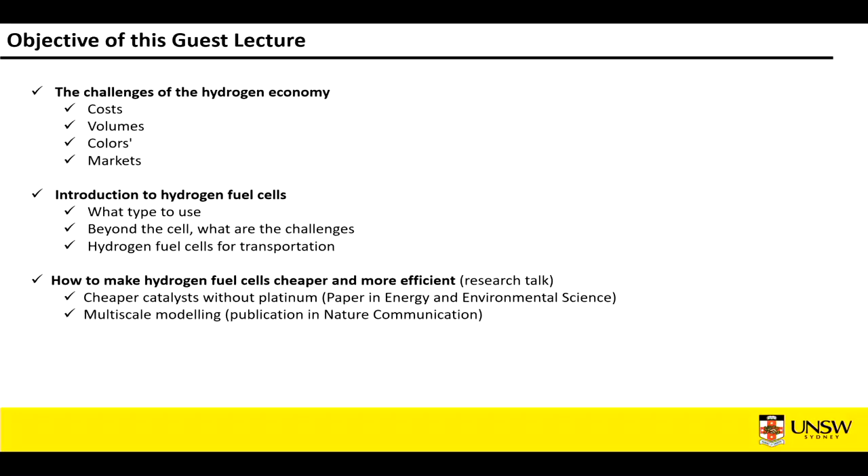So let's see. So the hydrogen economy. So first thing, all my figures are pretty much coming from the internet. I'm really focusing on telling the story of what's going on and giving my perspective. So I've removed the reference, but you can find all of these anywhere you want.

But the idea is hydrogen is a gas. It can be burned to produce high temperature. You can combine it with other elements. One of the challenges is you have very few amounts of hydrogen on its own. It's the world's most abundant element, but it's usually combined with other elements.

So what do you have? You can compress it, you can liquefy it, you can disperse it. That's the characteristics. It has a lot of challenges. One challenge is it's extremely flammable. It can catch fire, it can pretty much explode right away from the static electricity of your fingers. But that's something they've kind of sorted out mostly by storing it in big pressurized cylinders.

Otherwise, it takes energy to isolate. It can be challenging to transport because it's a flammable gas. There's a lot of work to make safer systems. And the big part of it, that's what I've been preaching: you can use hydrogen fuel cells as an alternative to batteries. And there is also work on hydrogen combustion engines, which I'll touch on at the very end, which are sort of cleaner than regular engines.

And you can use it in green. There's a lot of work for green steel. So instead of burning coal, you make it with hydrogen. That has potential as well. And there's a lot of different approaches.

So I actually made this slide, I think, about a year ago for a small conference, and I got sick, so I couldn't make it. So you guys are the first one.

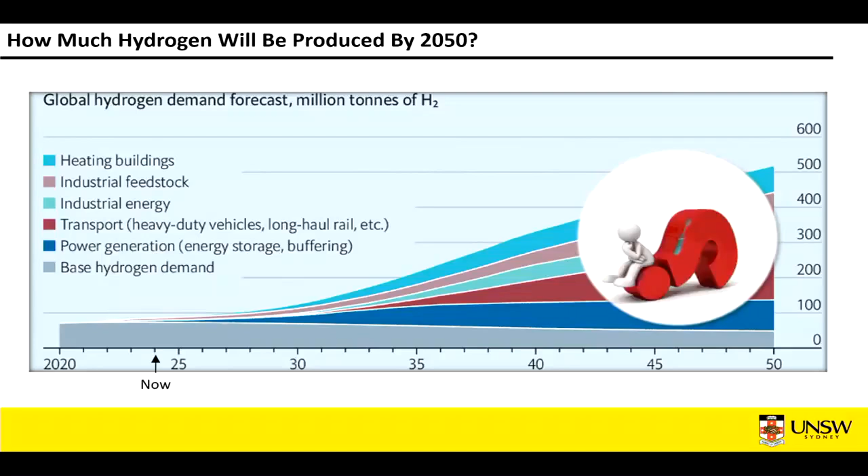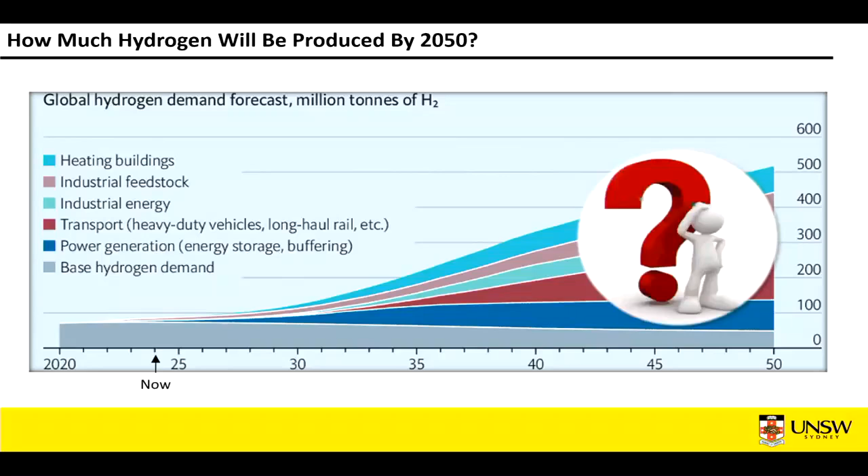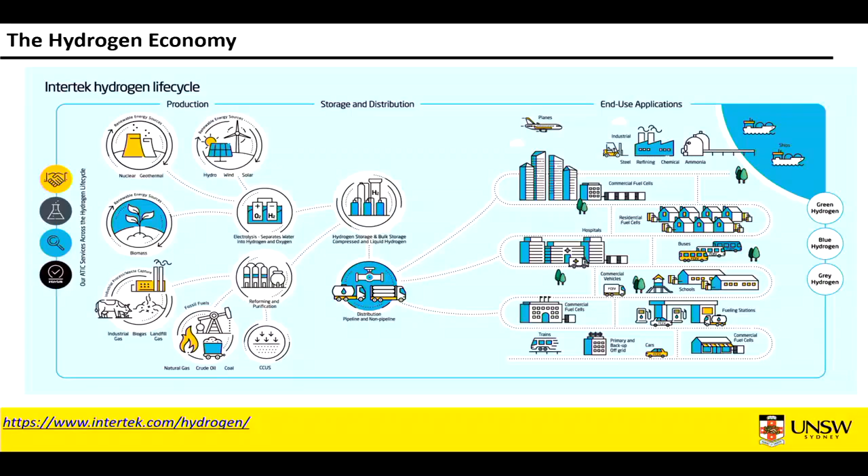So the first thing about hydrogen, there's a lot of talk about different colors of hydrogen. This started with about 3 colors when I started doing this. There is gray hydrogen, which is done directly, I think, from natural gas, so methane, which gets split into hydrogen and CO, and syngas. Most of the CO2 you emit just goes right into the atmosphere. So as environmental engineers, you can tell this is probably not a good way to go. But that's how probably 90% of the hydrogen right now is made.

And then you've got blue hydrogen. Well, that's kind of better. You still make it the same process, but you try to trap all the harmful emissions underground. The problem you've got with that, if you want to make 500 million tons of hydrogen, you will end up with 500 million tons of CO2 underground. So that's not necessarily very scalable.

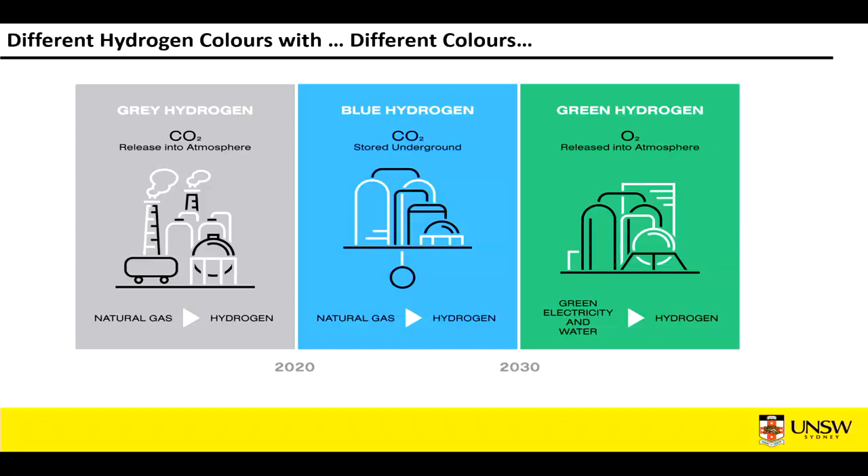And the best part is green hydrogen, when you basically want to plug 2 wires into water, split it into hydrogen and oxygen. It looks simple. In practice, it's not. It's very expensive. So this has gone from 3 colors.

And then a lot of companies say, I'm also making hydrogen with some fancy way, I also have a color. So you've got gray hydrogen, steam methane reforming; blue hydrogen, the procedure when you capture it; green hydrogen, which is the best. Turquoise hydrogen is a funny one, when you actually make hydrogen and physical carbon. I spoke to a guy once, his theory was, yeah, we'll make so much carbon, we'll fertilize the ground, or we'll create mountains, because we're physically making blocks of carbon at the same time. That has potential, but again, you have to think of the scale of it. 500 million tons of carbon on the ground may not be something we actually want to deal with.

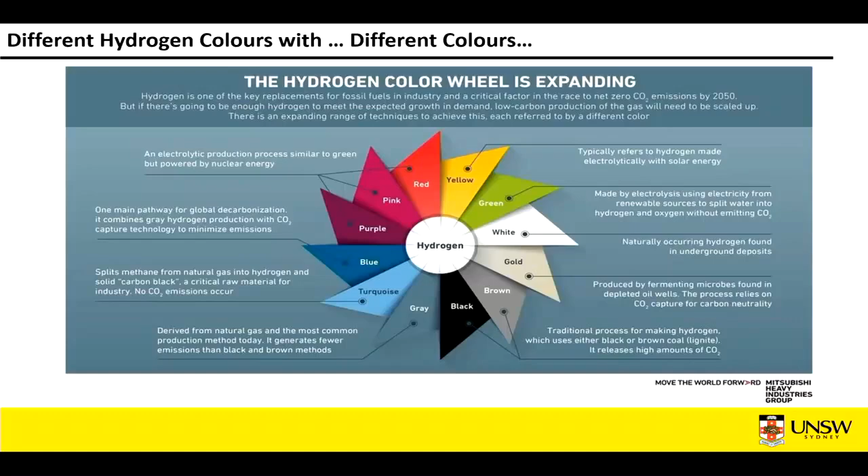If you use a nuclear power plant or a coal power plant to make green hydrogen, it's not green because you've made CO2 or you've made waste that's going to last hundreds of thousands of years. So not very good. The best one is the solar-made hydrogen. And then it keeps going all the way to the worst ones, processes making it from fossil fuel, splitting methane.

These are generally news articles about hydrogen, with all the different pictures - legit pictures that came out in the news. That's when people online were like, hey, what's the deal with hydrogen? So there's all this about the colors of hydrogen, the expanding ways of decarbonization, is hydrogen green, the colors of the hydrogen rainbow. That's when I started to see people on LinkedIn with weird titles like hydrogen P2X expert, hydrogen savant, hydrogen evangelist, when basically they've never even been remotely close to a hydrogen cylinder or an actual device. But they need to make a living, so whatever.

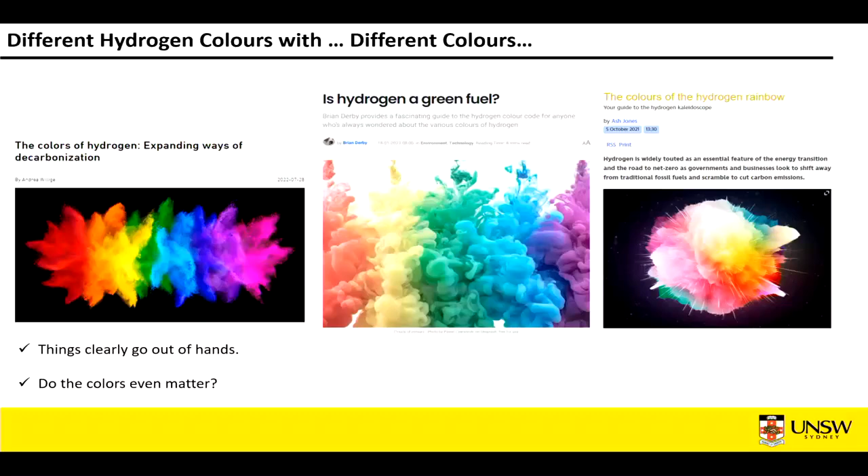A lot of people say, well, we should only make hydrogen with electrolyzers. The problem is the factories that have been making hydrogen with other methods, they can't just close business right away. It would take most of the systems, which have been designed to last 25 years. You can't just give up on that. So you have to find a way to make everything as clean as you can. You can even aim for negative emissions - say if you plant trees at the same time with whatever you've done, then you have negative emissions. Or there's a fancier way, if you reuse your heat or your CO2 and move it into something else. So let's see where we are here.

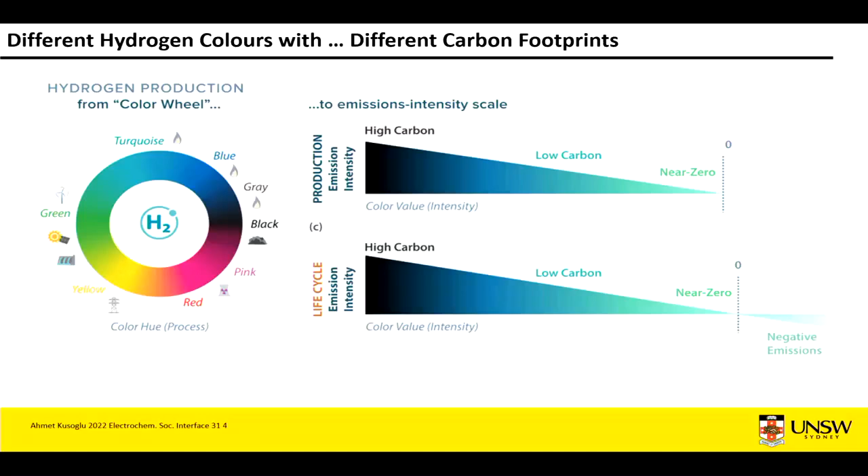I'm repeating myself a bit, but this is about the carbon footprint. Green hydrogen has no carbon, no GHG emissions, so no greenhouse emissions, perfectly clean - but it's only considered green. We got flagged recently in a proposal because we forgot that when we applied for funding. It's only green if the electricity is coming from renewable sources, from solar and wind. If your electricity is coming from coal, it's not green anymore, because you're storing the energy of the coal into hydrogen. Then you've got all these in between - pink hydrogen, yellow hydrogen, I think maybe the one underground, and then it gets weirder and weirder with less emission.

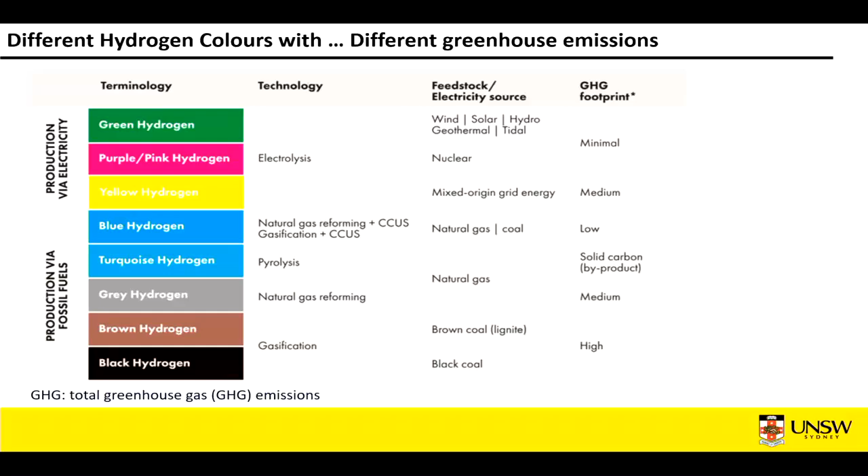The problem we've got is, this is easy - well, let's invest all the money into green hydrogen. And what do we have here? Sorry, the same thing, yeah - so high carbon to low carbon. Again, you should invest into the green one. The problem with that is that it looks pretty good.

The interesting thing these days is there's what people call cleaner than green hydrogen. The reason for that is there's an argument that nuclear may be cleaner than green. I'm not sold that this is actually true, because you're making nuclear waste that's going to last 100,000 years and will kill your descendants eventually. But right now, you could say it's green.

I work with people in civil engineering who work on that. But the point for me is, it may be completely green, but it may not be very easy to actually get it in a way that works. It may be blended with so much rock, oil, or other stuff that on paper it looks good, but it's not going to quite get there.

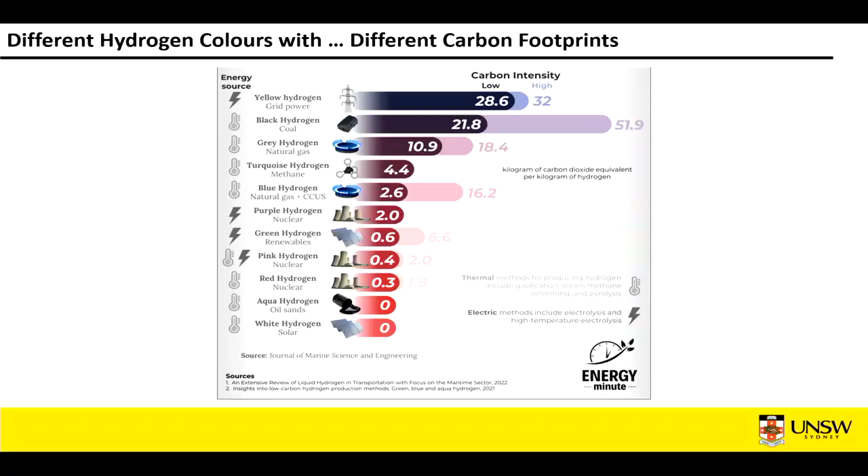The problem we've got is that we can't just switch all our money to green hydrogen, because it's also the most expensive hydrogen to make. And the reason it's so expensive is we need to use a lot of electricity to make it, whereas brown hydrogen and gray hydrogen, which have been out for quite a while, are way cheaper to make.

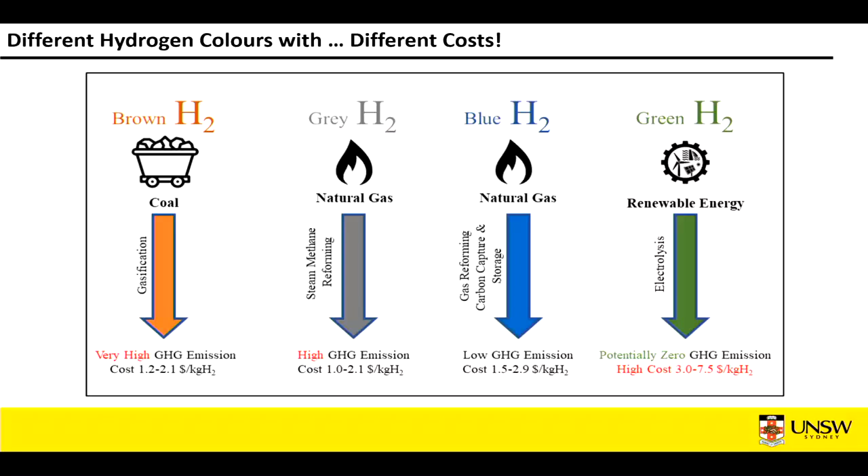These stats are changing all the time. There's a lot of work to make this cheaper, but overall the problem is how do we make the cleaner one economically viable? So the point is doing a lot of research.

Now that we've covered the price and cost, the volumes get worse. As I was saying earlier, 95 to 100% of the hydrogen currently is gray and brown, and some blue. The green hydrogen, which everyone keeps talking about, only makes up about 1%. And that's still evolving all the time.

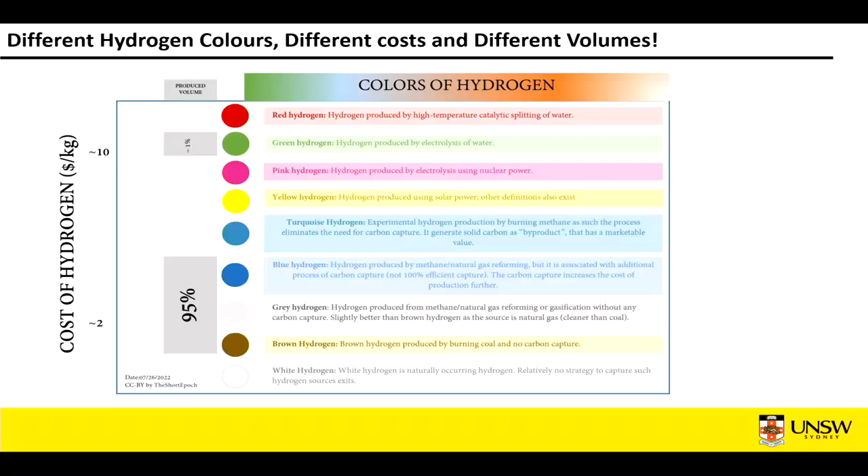But we want to go from 1% green hydrogen to 700 million tons per year in the next 30 years. So there is a long way to go. And again, that's what the prediction is.

As I told you guys earlier, this is a crystal ball. I'm pretty sure it's someone using Excel, making it slightly fancier than Excel, predicting: I've got this slope, it's going to increase by 2% every year, and there we go, we'll be completely fine in 2050. Well, we'll see where we go.

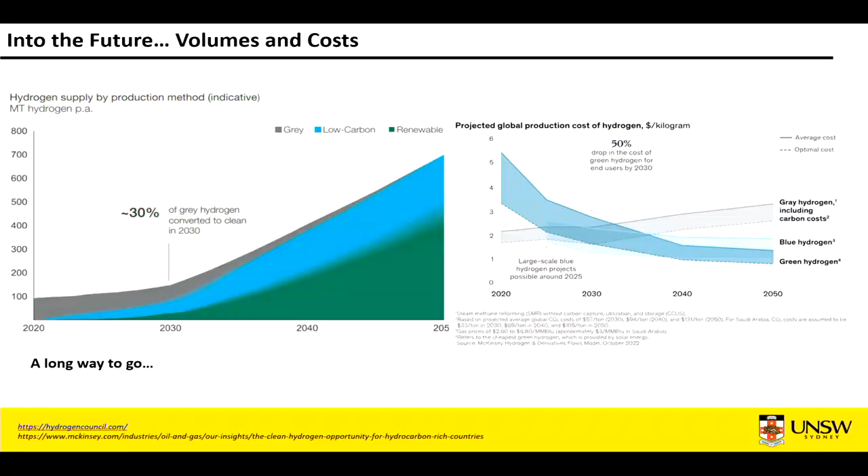I've done a slide later showing what was predicted for fuel cells versus what actually happened on the same time scale. It's not quite as nice as that, but that's where we are very much aiming to be, and there is a tremendous amount of research into actually doing this.

So how much is the hydrogen going to cost? I think this is green hydrogen. Right now, it's between $2 and $5 per kilogram of hydrogen. And where we're aiming to be economically viable is somewhere around $1 to $2.

The first part is making the electrolyzer more efficient — well, that's purely from my side as a chemist. Then there's a big part about making electricity way cheaper. Solar panel electricity is somewhere around $2, I think, in that price range. According to online sources, that's what people are quoting, but at the moment it's only for a very tiny area somewhere in the world where they found electricity was this cheap. Most electricity is much closer to higher prices. Again, you can make the device more efficient.

This is expired at the moment — I was doing a paper recently. The stats we're aiming for with an electrolyzer are somewhere around 100,000 hours, which is a lot more than where we are now, probably within the next 10 to 20 years.

And then there's the interest rate — I don't even know fully what that entails, but basically, you don't actually buy your system, you're loaning it from someone, and then eventually it gets cheaper and cheaper over time. This is where we are aiming to be, so there's a long way to get there.

Another part of this is, well, we're making a gigantic amount of hydrogen, so where are we going to put it? There are a lot of different fancy methods. One fancy method is the metal hydride or chemical hydride — basically you make materials that can physically store the hydrogen inside of them. The problem is you typically need some energy to actually do that; it's not as simple as just liquefying or compressing it. So that one is potentially more challenging.

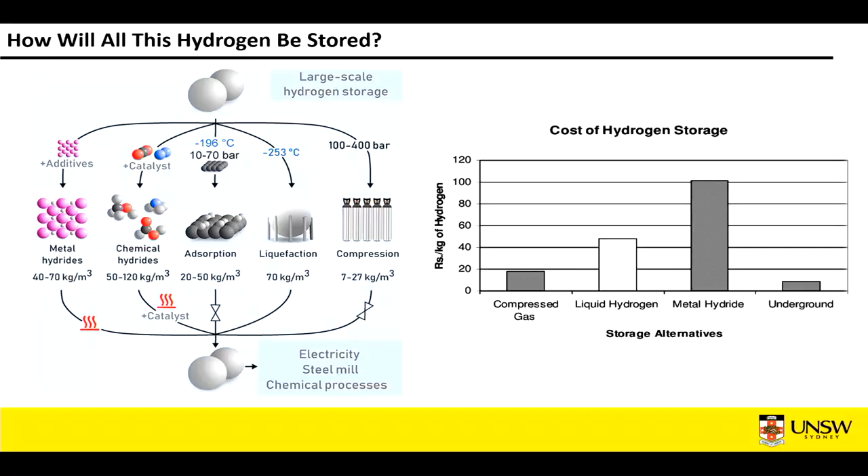That's what I'm going to talk about. This one, no, next, the slide after that. Wait, I think the order of the slides may be wrong.

So about storing it underground - that's very relevant to civil engineers, as far as I know from my friends who work upstairs - we have depleted salt caverns or depleting oil fields. It's depleted and was able to store gas really well, so could we just fill it with hydrogen? That's very seriously considered. The question we still have is hydrogen is a much smaller molecule than the other gases that are stored in it - is it actually going to work on large scale or not?

At the moment it seems like it has potential. There's been small studies, but this needs to be done at a very large scale to know if it works, to know if you lose hydrogen, to know if the hydrogen will mix with whatever is underground. So that's still quite up for debate.

Let me see for this one. Oh yeah, Australia is getting very excited by hydrogen underground, mostly, I think - and Eddie can correct me on that one - because we've got a lot of salt caverns in Australia and plenty of space where you could do it. So there's a lot of different projects about generating hydrogen on this side, and then there's a lot of different places where you could store it within Australia.

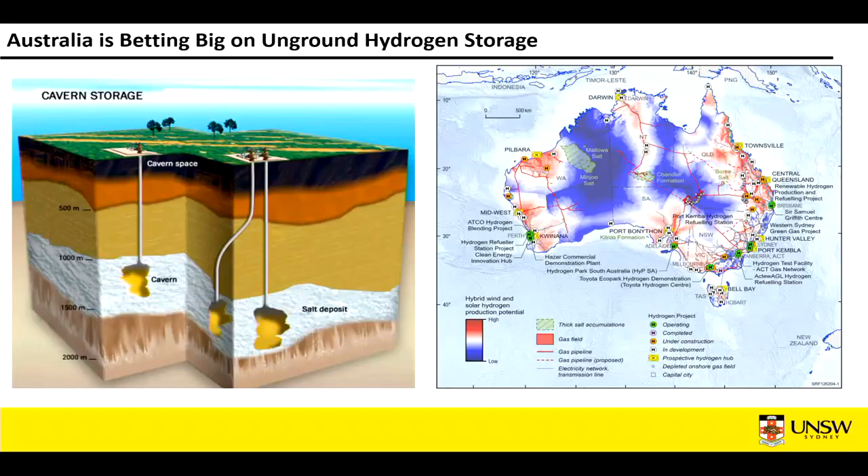So I'm just going to go back a few slides. Oh yeah, so what does it say here? How will all this hydrogen be released? Now that we've stored it, and we found loads of ways to make it, how will we release it - will it cost us energy or not?

So liquid hydrogen is potentially a bit difficult because you need to go to very low temperature, minus 253 degrees, so you need energy to even store it, and then you consume a little bit of energy releasing it. So the physical methods probably need some energy. Compressed hydrogen, you don't need any energy - you just open the cylinder and it vents out. And then you have the other methods that cost more and more energy.

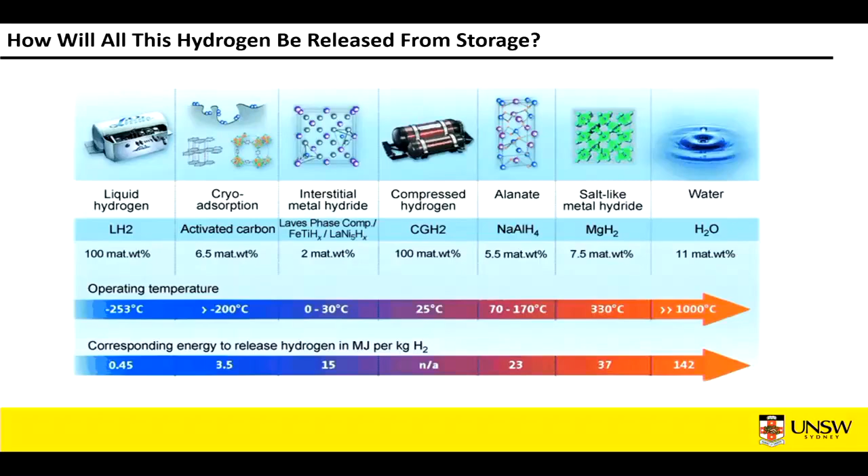I think this one - it's not water splitting, it's water cracking. So at very high temperature, you can actually split water into hydrogen and oxygen. At 1000 degrees, that will cost you 140 megajoules per kilogram of hydrogen. So that's not what we want to be doing, even if it's conceptually very interesting. In practice, it's not - people are not going to invest in something that consumes an enormous amount of energy to just release the hydrogen that you spent a huge amount of energy to even make.

So now I'm going to go back a few more slides after this. Oh yeah, how will the hydrogen be transported? Now that we've made all this hydrogen, where do we actually go from there? So someone wants to use it - say in Australia we make a lot of hydrogen, we want to sell it to Japan.

There's been a project, I think, when they put hydrogen on a boat, there hasn't been a great amount of talk about what happened with the project. I've heard rumors that it may have leaked out because there was a massive boat filled with hydrogen, and it was debatable whether it worked. The other way - and I've seen an action movie, I think with Nicolas Cage, where there's a hydrogen tank on the highway blowing up - is basically just filling massive trucks with hydrogen and transporting it that way.

That is probably going to play a part in it, but it's most likely not going to be the way to go to do it at large scale safely. What's more likely are the pipelines. We've been using them for a long time, we know exactly how they work, and we know they don't leak, so that's a good step.

The plan for some of the pipelines is to gradually increase the amount of hydrogen blended with natural gas, getting to 5%, 10%, even 20%, and seeing how they behave with the boilers and the systems. Eventually there will be pipelines that are just hydrogen focused. That will cost a huge amount of money, but it's something we know exactly how to do. A big part of this is if we want to do it in 30 years, it's hard to invent new technologies right now because they won't be ready in time. So mostly, the key takeaway is that pipelines are most likely the way to go.

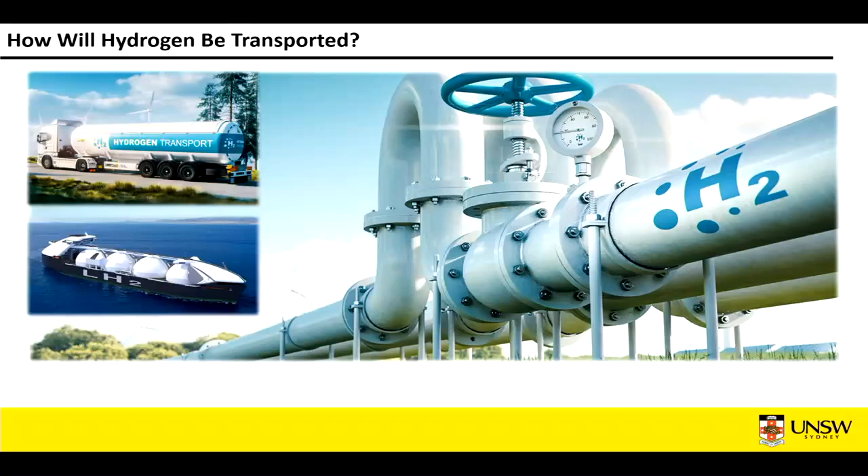Now there's something called hydrogen valleys. The idea before was: make electricity in Canberra, then have a huge cable going to Perth, and then ship it to Singapore. People looked at that and realized it wouldn't work because it would be so expensive it doesn't actually make sense. So now what people want to do is make hydrogen where you want to use it.

You have a solar plant or wind farm that makes hydrogen right next to the factory that's actually using it, and you store it underground in a massive well. In practice, that narrows down where you can do it, but it's much more economically viable because you make it where you need it, instead of using petrol to transport your hydrogen in a truck, which is where you start losing efficiency.

There are a lot of hydrogen valleys popping up around the world at the moment, and a lot of development in that area. A good case study I found is what's happening in Europe, because countries are actually working together to make hydrogen.

This picture shows different places involved. In France, we're making hydrogen. Then there's a pipeline somewhere - they have a pipeline in Germany to transport the hydrogen. And then somewhere else, also in Germany, we're storing it, and then using it that way.

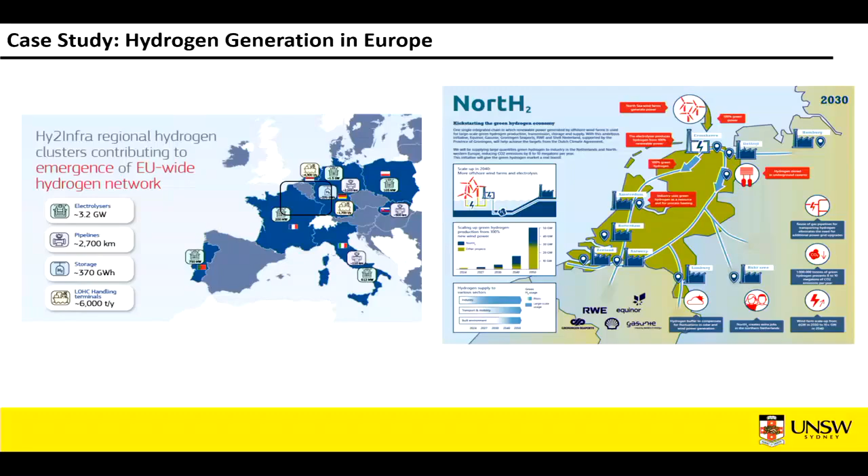This is a close-up of a case - the text is unreadable, so you'll have to believe me. The idea is that we have a wind farm, I think somewhere in the Netherlands, along with energy coming from elsewhere. We split it into hydrogen and use it right away, even demonstrating on a small scale how to use your hydrogen.

This one is a bit clearer - it's about the hydrogen pipeline, showing how to transport hydrogen across different places within Europe. For instance, if you have lots of wind farms near England and want to get hydrogen all the way to Portugal, you need pipelines to transport it across the ocean. Then you can store it in a massive aquifer near the border with Spain, keep storing it, and then transport it further.

There's also a lot of talk about making hydrogen in Africa, because they have huge amounts of sunlight and massive green energy potential. They could ship it to Italy and it keeps going from there. In Poland, they have salt caverns for storage.

Let's use them for that. Hydrogen underwater solutions in Finland. They're talking about massive hydrogen networks in Germany, so all of this working together.

The big part of this is all a bit 'maybe it will happen.' A problem we found with a lot of hydrogen projects is they don't always turn into a real thing, mostly because they're way more complex than people think. Typically, a hydrogen plant takes 5 years to make, from the day they sign the deal to actually having something. In 5 years, the government may change, the company may not exist anymore, or the investors may have pulled the money.

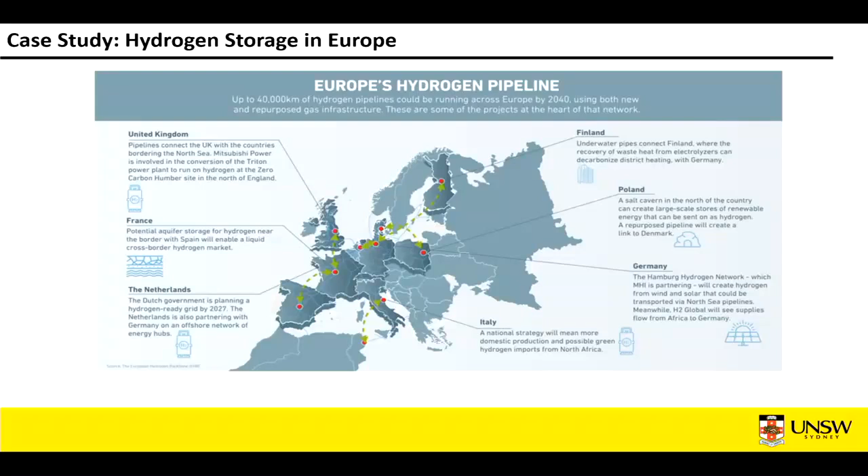The problem with this is often, on these slides, at the very bottom, there's a logo of a company. That company may be a startup with plans to become a multinational or multi-billion-dollar company in the next 20 years. So there is a journey, but that's the idea of it.

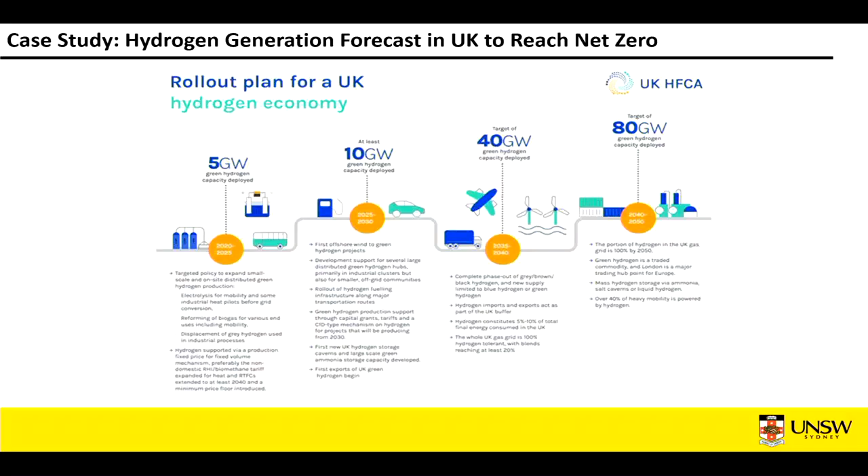So now the question is, we've made all this hydrogen—what the hell is it even for? A big problem we found recently is that there is more enthusiasm about making hydrogen, because there is a lot of money in that, than there is enthusiasm for actually using it. So there starts to be more supply than actual demand for hydrogen.

And that's a problem as well, because then the company's stock can disappear overnight, because the investors say, well, you're not going to use it for anything, you're just going to make a massive amount of it. And that's not helping anybody. So there's a big debate.

So there's two main applications. You can transport it and use it for something else—you make it into ammonia, very good for fertilizers, much cleaner than other ways to make it. Then there's the whole green steel part, and then there's the whole fuel cell part. I'm working on fuel cells, so I'm mostly going to focus on that, but there are other applications of hydrogen in industry.

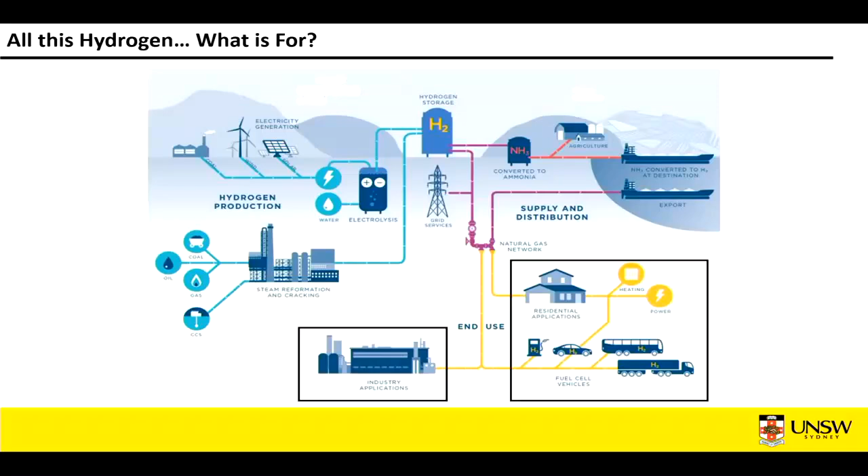So low temperature PEM fuel cells are what's most established at the moment. They require platinum catalysts, extremely expensive. They work at low temperature, so not too much heat is needed to operate them, but at the same time they're very expensive. Solid oxide fuel cells can use some fancier materials, but they work with much cheaper metals—though they need about 800 to 1000 degrees just to turn on, to even get electricity out of them.

As you lower the temperature, the materials become more expensive, and as you go the other way, you get more efficiency. So the two fuel cell types really progressing in the market are low temperature PEM and solid oxide fuel cells. The ones in the middle have kind of stagnated, haven't gotten beyond the lab, mostly because they're not that efficient and not that cheap either. So you have a trade-off: no one wants to invest a lot of money for something that doesn't give much power, and they also have a lot of engineering problems.

Next slide, I'm going to show you a comparison from an industrial perspective: if I'm a company and just want to make electricity from hydrogen, how would I choose which fuel cell I want? Oh wait, no, that's not coming yet—that's in a few more slides. Let's rewind for a second. Hydrogen fuel cells... I really need to check my slides before I come next year.

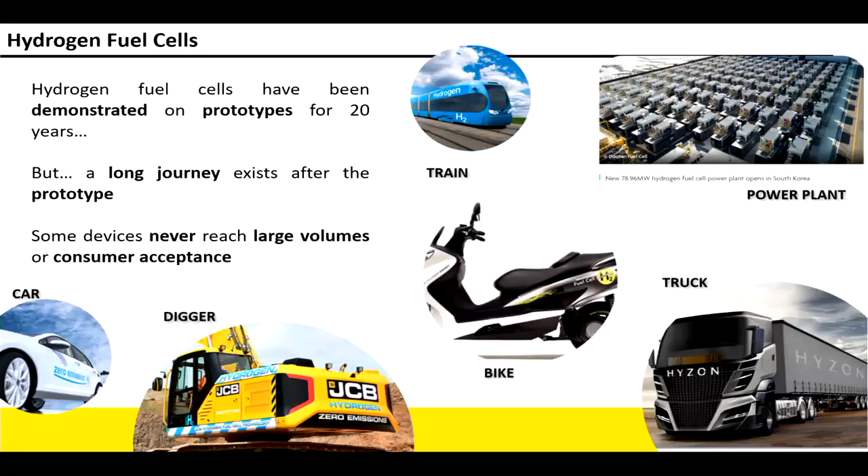One I find really interesting is massive fuel cell power plants—literally having millions of fuel cells working together to power a city. But that also comes with its own challenges. So now let's see—I've got a bit of a case study here.

It's a rough example of how you go from a fuel cell toy. You can actually buy this online for $10 without any safety certification or anything. You can buy a tiny fuel cell, a tiny wind turbine toy from a company called Horizon, and you can make your hydrogen yourself. It's so small it's completely safe, they don't even care about the safety of it. And then you can make a tiny fuel cell, and you can actually use this to power a toy car.

So how do you go from this, which generates pretty much less than a watt, to a 113 kilowatt, or I think it's even higher now, 200 kilowatt fuel cell car? Where do you go from here to there? So the first question is, what type of fuel cell do I want to use?

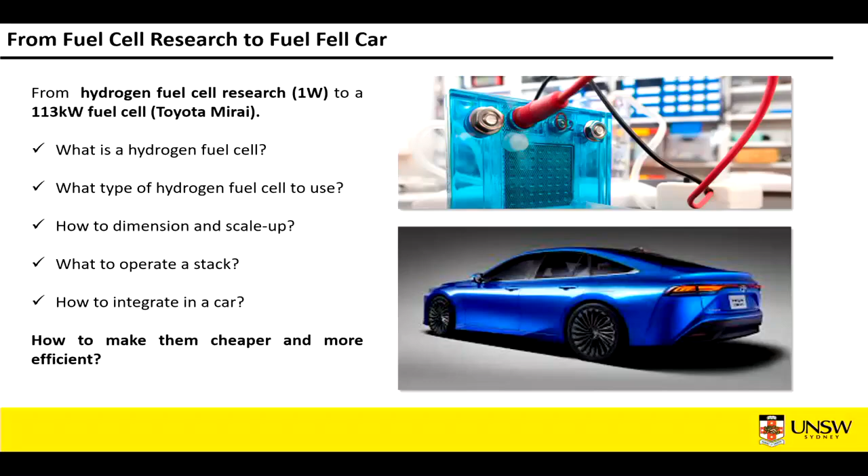After that, what else is there? What is a fuel cell is probably the first question. Then what type to use? How do you make it larger and larger, how do you go from 1 watt to 113 kilowatt? Next question is, how do you actually put it into a car, and how does the car actually work, is it going to work? And then the last part, which I'm talking about at the very end, is how do you make them cheaper to the point that they have a market?

Solid oxide fuel cells have some advantages and some problems. The biggest advantage is you don't need to use 100% hydrogen. You can use hydrocarbons because you operate at such a high temperature, you don't need the gas as pure, and you don't need to use platinum. You can use much cheaper materials.

But instead of freezing, it requires heating to that temperature. So it can work really well in a factory when you've already generated the heat, but it's not going to work very well if you want to power your house and need to consume electricity just to turn on the fuel cell. That's the bigger problem, how do you actually start it? And in general, I've seen less and less talks about it, I'm not sure they're going to happen. The idea is it has potential, but it's not necessarily market ready, it's not ready for any market.

In terms of requirements from a company for any fuel cell, industry always wants the same thing: I want it very cheap and I want it now, and I want to be able to make a really big one out of it. So low cost, scalable, and most importantly, you don't want to have to wait a day before you have electricity in your house, you want it right away. So PEM fuel cells are much more promising and much more mature, but in the very long run, and that may take a long time, high temperature fuel cells may have other advantages. But again, whether they'll happen or not is still up for debate.

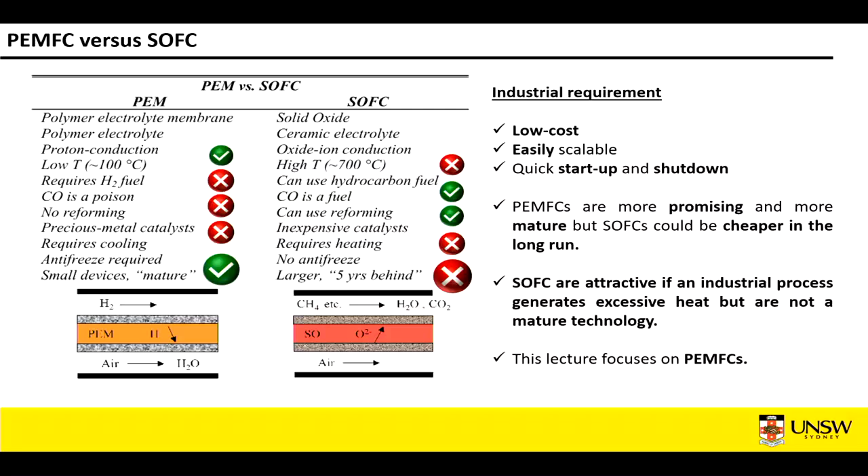So from now on, I'm going to focus on PEM fuel cells because that's what I work on, and that's what I think is more mature. So let's say you want to make a fuel cell, imagine you're doing a PhD in chemistry, that's the case of my PhD student. They're doing research purely on catalysts, the materials that go at the very inside of a fuel cell. What's the journey from here to there?

First you make a catalyst, then you scale it up to a device. That probably takes a couple million dollars for research groups to do, because it's much harder to scale up synthesis than it looks. It's not just, well, I'm going to hire 10 people and do it. You probably need much more complex equipment, and you may consume a lot of energy doing that. So the synthesis that worked really well at small scale, you may find out isn't actually green anymore because you're consuming so many nasty products that you may not want to do that. But let's assume you can do it. So you make it into a small scale, then you make it into a stack.

A stack is basically a system that generates enough power. It's an assembly of single cells, and then you make it into a system, and then you try to commercialize it. It's on average 10 to 15 years between the start of a catalyst and the remote chance that it makes it into a device, or all the way through.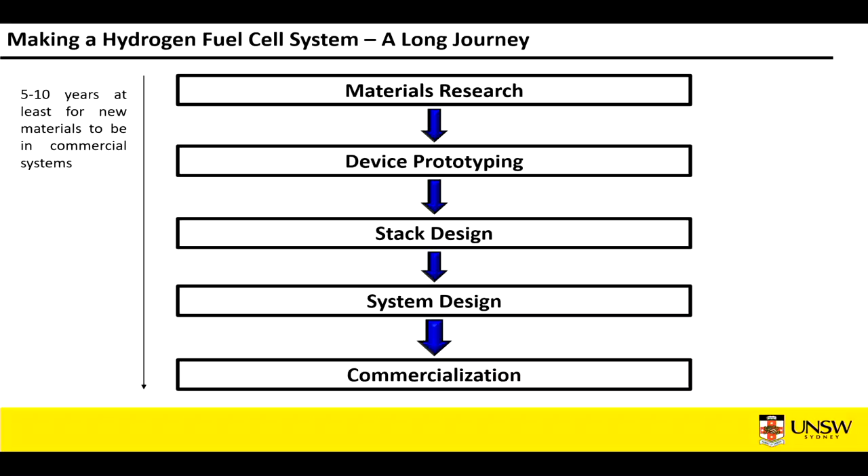So how do hydrogen fuel cells work? Well, in principle, it's really simple. You put hydrogen on one side, oxygen on the other side. Hydrogen splits into protons and electrons. The protons go across the membrane. They react with electrons and oxygen, and they make water. So in theory, it's one of the simplest reactions there is.

The first paper on fuel cells was from 1830, I think, when the guy said, oh, it's amazing, it's going to save the world. The next paper is from 1890, when the conclusion was it's going to take a lot of work and it's not going to be easy to make this actually work. So there is a long journey, and right now the best catalyst for fuel cells is platinum. Platinum is one of the most expensive metals. That's a different problem for later.

So now, okay, we've made a fuel cell, we got it. So low temperature fuel cell - that slide is a bit more technical, but it's the same concept. You have a cathode and an anode; hydrogen splits into proton and electron, and at the cathode you have oxygen plus proton plus electron, which gives you water. And that's roughly how the structure looks like, that's just a cartoon of it. But the main giveaway is there's a lot of gas diffusion and water management challenges in fuel cells. It's not quite as simple as the first slide. You have a lot of different problems.

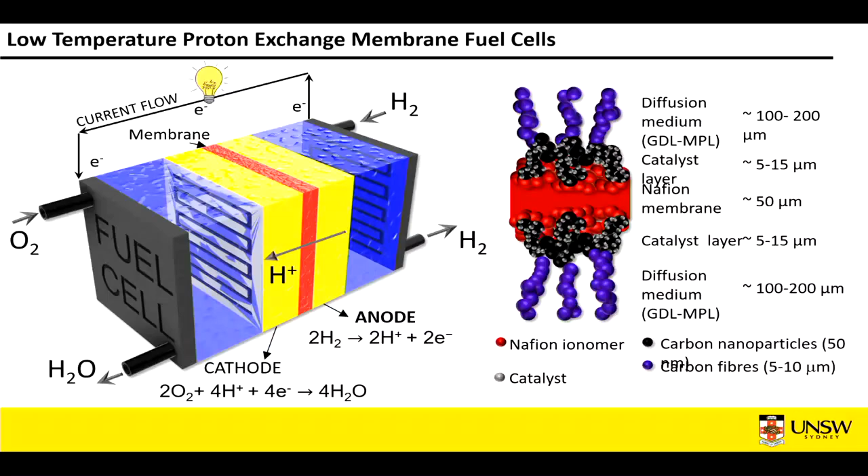Fuel cells are basically a mechanical engineering nightmare, or dream, depends on who you ask, because you have thermodynamics, two-phase flow, chemistry, and at the same time different current density in different areas, and then you want to make your own materials. So in a very, very compact system, there's a lot of different problems. There's basically a job for everybody, but the problem is you want these people to work together to make something that works. So I've made a cartoon once about how to make it.

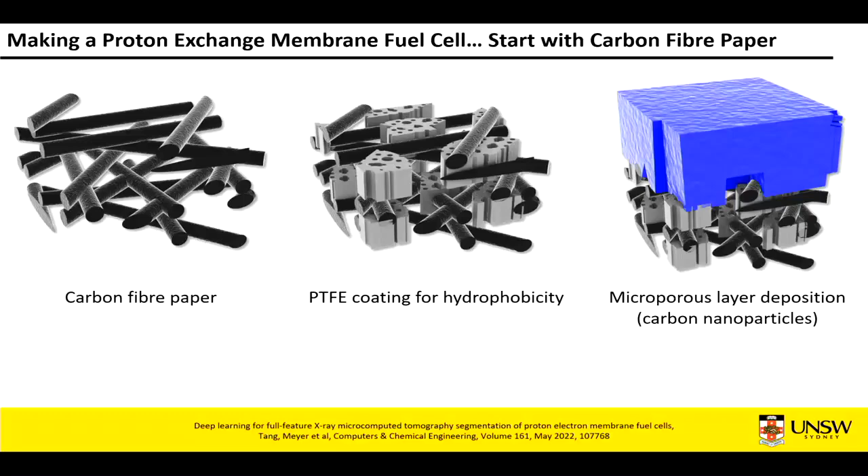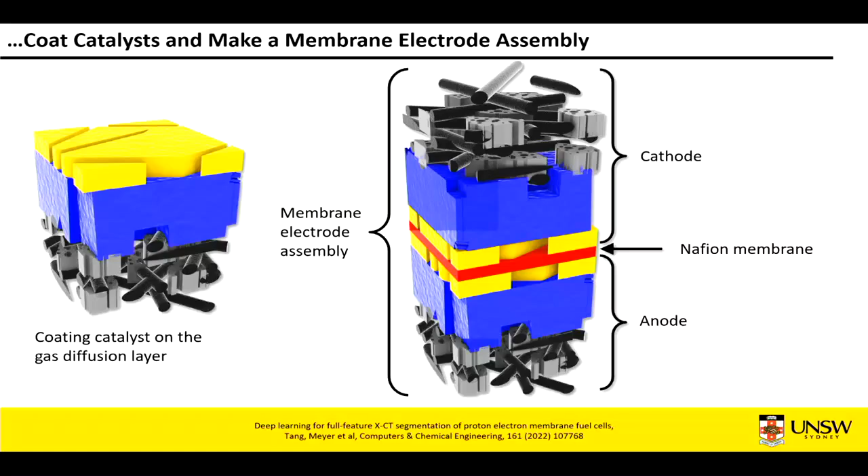Typically the way fuel cells start is with some carbon fibers, so very, very cheap carbon paper, and then it's coated with something to make it more hydrophobic. And then we add more carbon to increase the contact area, making it with carbon nanoparticles. On top of that, we put some catalyst, that's the material in yellow. Then we put a membrane in the middle to exchange protons, and that's how your structure looks like. So it's actually fairly simple. Most of it is done in industry. The catalyst someone makes, you deposit them directly. It's fairly straightforward. That's actually how it looks like.

So the fuel cell itself is a membrane, a material about 1 millimeter thick with all of this stacked in it, and this one's pretty tiny. You have a thin membrane, some catalyst, some materials, and the potential out of a fuel cell is 1 volt. So one way to make high power is you make it massive, and then you can draw a massive current from it. The problem with that is because they have complex thermodynamics, there is a maximum size a fuel cell can be.

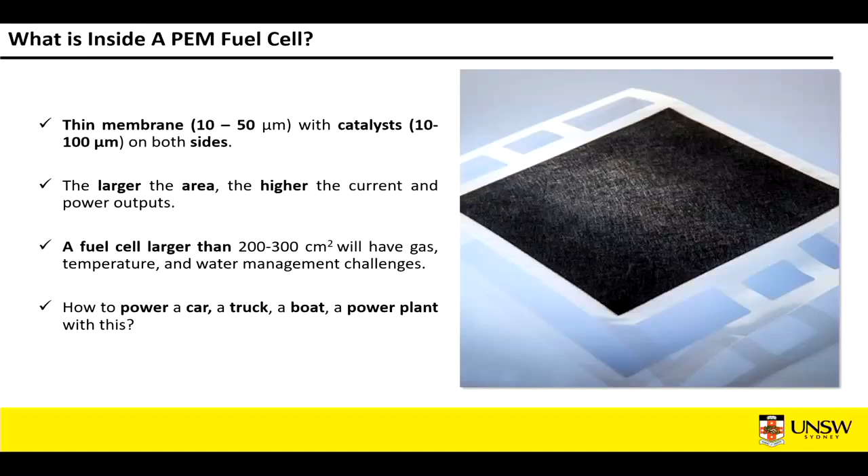Probably above 100 centimeters square, you start to make so much water in one location that to transport it from the inlet to the exhaust, you have flooding issues, and it actually stops to work. So instead of that, probably 100, 200, 300 is the maximum you can make. So now you're stuck with something about 10 by 10 or 15 by 15 centimeters square. How do you actually power a car with a 1 millimeter cell?

Best way - and this has been done in industry forever - you just stack them, you put them in series. Instead of having 1 volt, you put 10, you have 10 volts. You put 100, you have 100 volts, in that kind of range. So it's called a stack. And you just keep increasing it to increase the voltage and power. So I did that math a while ago.

Well, I was doing fuel cells for a phone charger. I actually made one in the lab to power a phone. And then I made that, and I was so excited. And then we were like, that's not actually very exciting, because everyone has done it before. But you actually need 5 watts to power your phone. The source is my phone charger at home.

I checked that. And so for that, typically you probably want 12 volts, a very, very tiny current, so it's safe, so you don't blow yourself up at home. That's 0.04 amp on a 10 centimeter square area.

And then you make a few fuel cells, same thing, 20 cells, so you stack 20, make them pretty tiny, and you're good. I've looked online for the Toyota Mirai specs, and you can very easily reverse engineer and get roughly the idea of the size of it and how many cells. So 113 kilowatts, assuming they work at the same kind of operating point, then you need in the 370 to 400 cells. So 400 of these in a stack. It looks probably this size, it's still quite compact, and it will give you 220 volts and somewhere in the 20 to 50 amp range per cell, so that's quite a lot of current going through these.

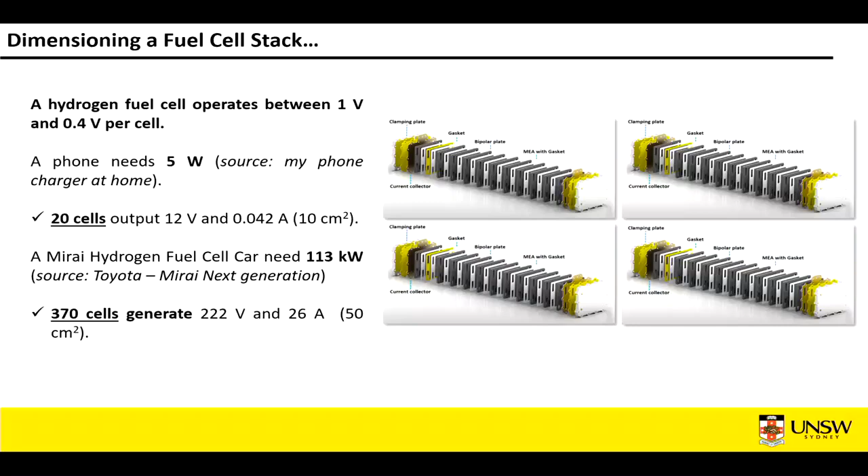But looking at this, now we're like, okay, we've made a stack, we understand that, how do we put it in a system? So on the left side, you've got the fuel cell toy car, and for that you basically need nothing. You just have your fuel cell electricity, and it powers a tiny DC motor, and that's a fuel cell toy car. That's the one you can buy off the internet for $20.

Now you've got the much more complex one, which is the real one that's coming from Toyota. The bigger they get, the more complex the water and heat management becomes, and you need a lot of different parts. The first part you need is fuel cells use air from the atmosphere, but there's a lot of impurities in the air, and you want very clean air going into fuel cells, so you need some sort of filters.

What else do we need? You want to compress your air to a certain pressure, so you need a compressor. You produce water from the fuel cell, but you want to be able to recycle the gas that's coming out, so we probably have a separator. And then it gets bigger and bigger. I'm not entirely sure what the air-con compressor is in the picture, but you have a lot of different components that come in.

And that's the part that becomes trickier and trickier: the only power source is the fuel cell. So how much power am I going to consume to be able to turn on the fuel cell? At the moment, there's a lot of work on this area, because 20% of the power that you make from the fuel cell is used to actually turn it on.

So there is quite a problem, and typically the way fuel cells work is there is a battery that powers the actual system. The fuel cell recharges the battery, and to start the fuel cell, you draw power from the battery, and eventually you make enough power that you can consume the power from the fuel cell to operate it. So there's still quite a lot of fun problems in there.

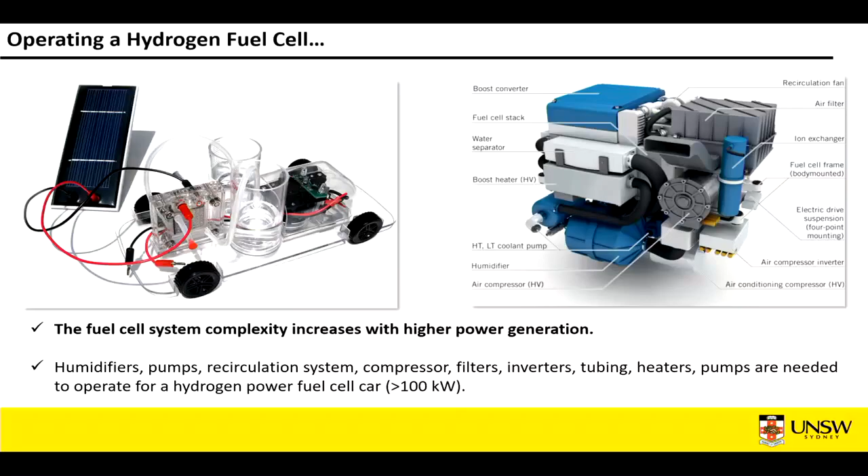So how do you power a car with a fuel cell? It's the same for a truck, a plane, a boat. It's all the same concept. Fuel cells mostly like working really well at a fixed power. Cars and all of these like to change the power so you can actually speed up on the highway, and you can't do that if you just run a flat power.

So the way they work is mostly the fuel cell is actually a hybrid system. It's recharging a battery, and all the power fluctuations are taken from the battery. The fuel cell keeps recharging at a set power, which may change a little bit, but mostly stable. The fuel cell can't remotely cope with power fluctuations, because you start to make water—if you generate a lot more power suddenly, then you're making tons more water, and that may need a whole new setup, which increases the challenges.

So the battery handles basically everything in the actual running, and the fuel cell is constantly charging your battery. And there's been, I think, one fuel cell car doing a demo Sydney to Melbourne on one full tank of hydrogen.

That was done by a professional driver that didn't even stop and knew what they were doing. I reckon if I was to do it, it probably wouldn't work, but they managed to do it.

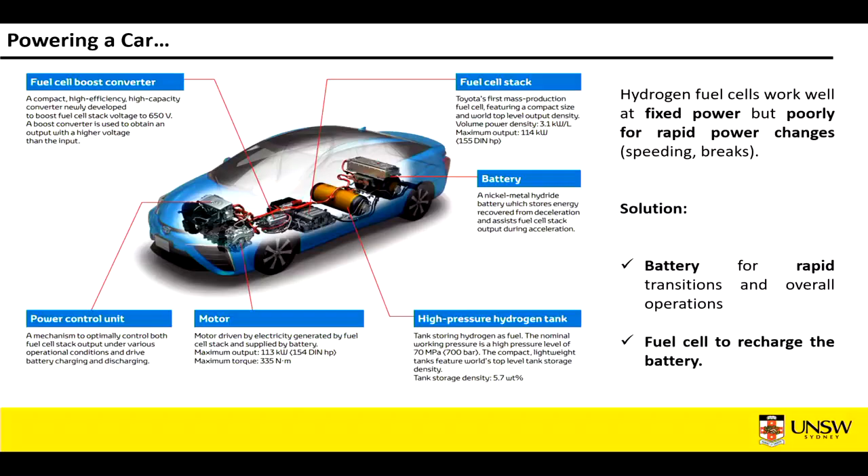These numbers get harder to find because fuel cell companies don't really want to highlight that they're not doing well. But a lot of projects on passenger vehicles for fuel cells, the companies are slowly withdrawing investment because people figured out, well, actually, I can drive a Tesla pretty far. Maybe the whole rhetoric for fuel cell cars, that you may not find a power station in the middle of nowhere, the answer was, yes, you may. So they may still have a place, but for passenger vehicles, I'm less and less sure they will happen.

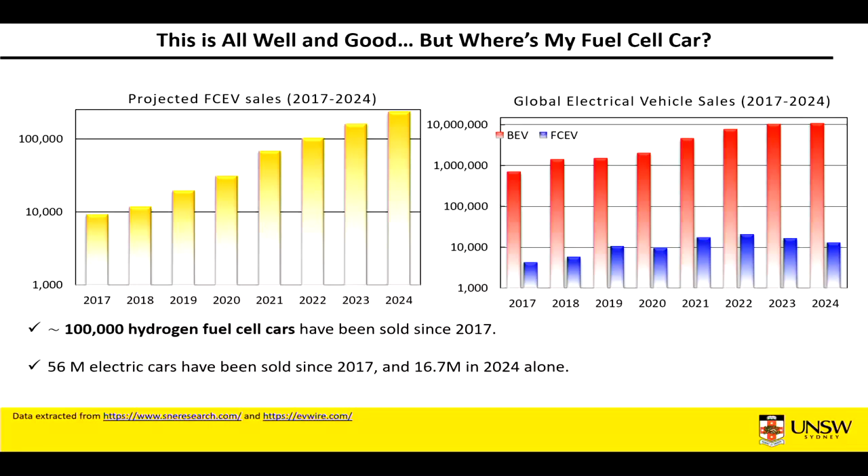The other big problem, obviously batteries are getting better and better, but the other problem is if you want to recharge a fleet of buses with electricity, it may take the same amount of power as the small town next door. And you typically want to do this when the buses aren't running, at night, which is when you want electricity to go home. So that's where the whole debate comes in: when you want high power, high autonomy, and lightweight, batteries are not quite going to work.

They may keep improving, but the fundamental point is to have more power from a battery, you just have to make them bigger and bigger and bigger. There's not much of a way around it. Whereas with fuel cells, we don't have that problem. We store more hydrogen, we find clever ways. The fuel cell remains the same size, but we can have a different pressurized hydrogen cylinder, different technology, and store more and more gas. The weight doesn't change because it's just the cylinder at different pressures.

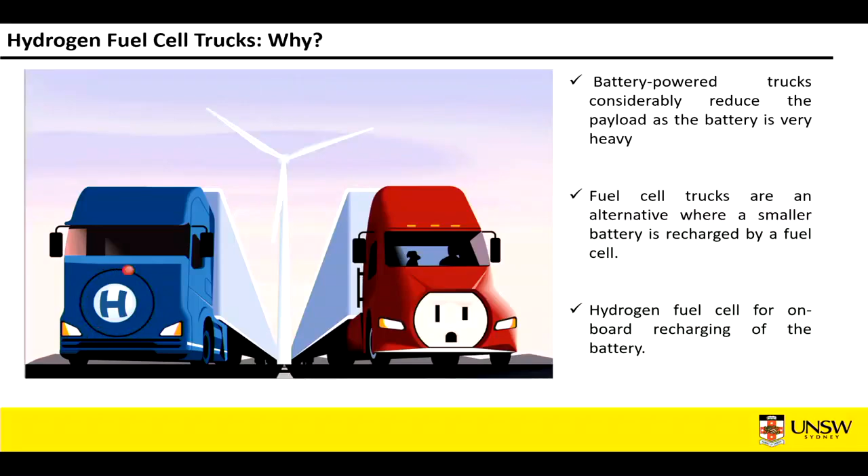There's a lot of talk about it. It's exciting people a lot. Whether or not it will happen is still up for debate, but conceptually, it has a commercial sense.

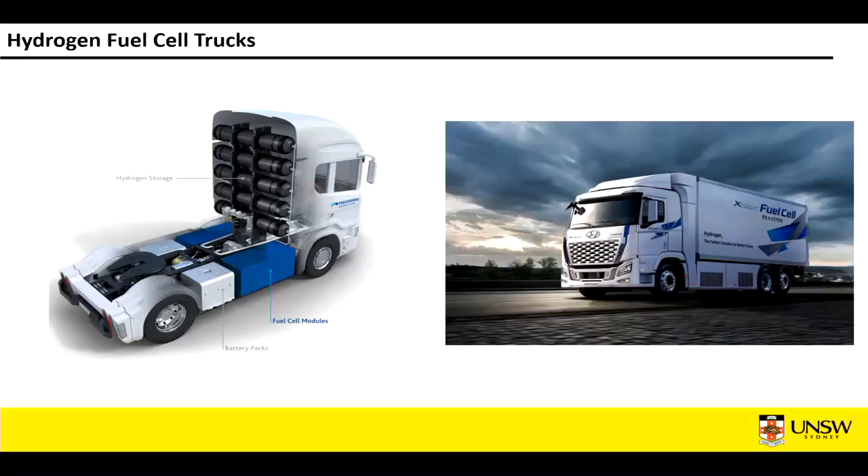Now, there's a fun one - what I'm actually working on at the moment - hydrogen fuel cells for planes. So why bother with fuel cells for a hydrogen plane? Well, the first reason is we're all living in Australia here, and the only way to leave the country is to take a plane. Australia is one of the biggest emitters of CO2 per capita, I think, because of aviation.

In the world, aviation is about 3% of CO2 emissions. In Australia, it's closer to 5 to 6%, simply because there's no way to get anything out of Australia without taking a plane, unless you take a boat to New Zealand - and that already takes a lot of power.

So a battery-powered plane - and I tried to dig up a photo but couldn't find it today, though I found it a few years ago - would require a completely new design of the plane. Imagine a wing that's 10 times bigger, with all the batteries in the wing. The problem is the wings become much heavier, and you struggle to actually move the plane again.

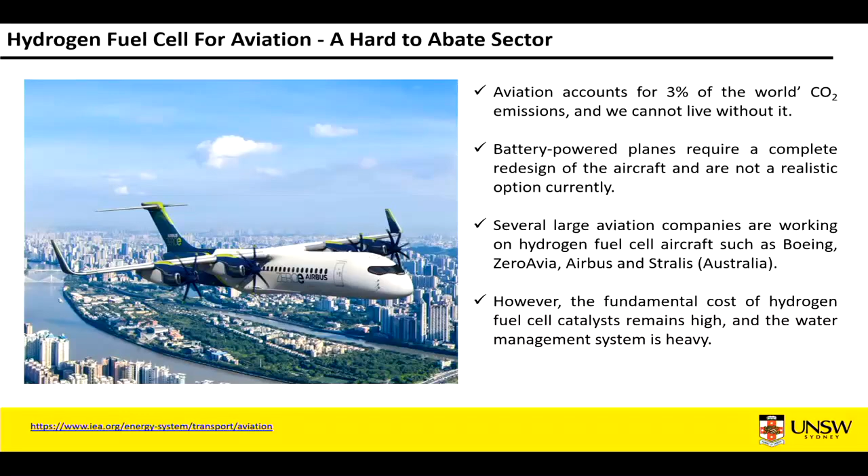There are a lot of companies doing this in Australia and around the world - Boeing, Airbus, and one company, ZeroAvia, who are doing this at large scale. There are also two fun little companies in Sydney, Australia, trying to prove the technology at a very small scale. But the problem is it's still not that simple to do.

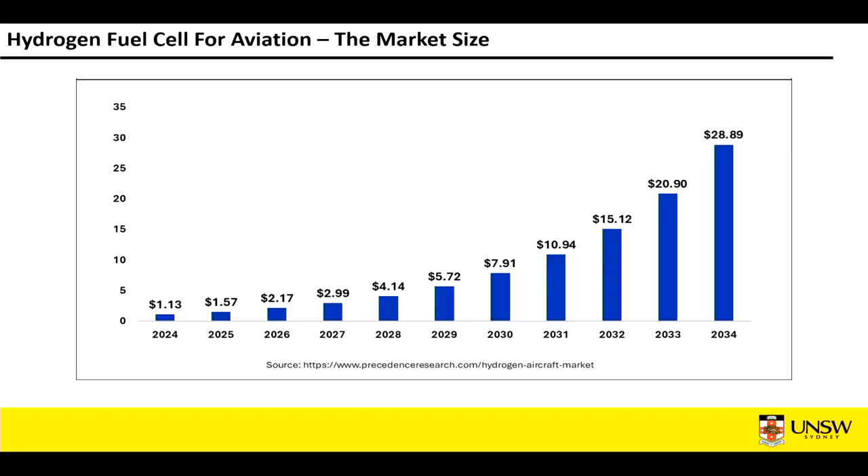So again, look at the market size - billions of dollars, or millions, whatever it is. There's potential, but it's not exciting people yet as much as fuel cell trucks. We're only at 1 to 28, whereas the fuel cell trucks were 1 to 150. The reason is this requires way more R&D, and the technology isn't there at all yet. There hasn't been a large-scale hydrogen fuel cell plane just yet. So again, let's just see what happens.

So I'm going to go a bit faster into this slide, but basically a big problem of hydrogen fuel cells for planes is the weight of the fuel cell. So planes like solutions that are very, very lightweight.

Fuel cells generate liquid water, so they run at around 80 degrees. That means you literally need to store your water, and you also want to cool them to 80 degrees, so you need a whole water recirculation system. That consumes a lot of energy. It's heavy. For long-term fuel cell planes, you probably don't want that.

There are high-temperature fuel cells that are an entirely different can of worms. My PhD student is getting gray hair every day with high-temperature fuel cells because they're much more complex to operate. But the good thing about them is they don't need liquid water, and they don't generate any liquid water. They run at 160 degrees, which opens its own challenges. It needs a different membrane, different electrolyte, different everything.

But the idea is, even if you're winning on one side, you're losing because the technology is not quite ready yet to work. But they have great potential, and companies are looking at low temperature planes first, and eventually high temperature fuel cell planes. Again, only 160 degrees, still feasible.

So this is where they put my face everywhere this year, because I'm doing a tiny project on putting a high temperature fuel cell on a drone.

We flew the drone yesterday. We drove it straight into a tree, so that was a good step. At least now we know the drone flies. It took us 4 months to be confident to fly the drone.

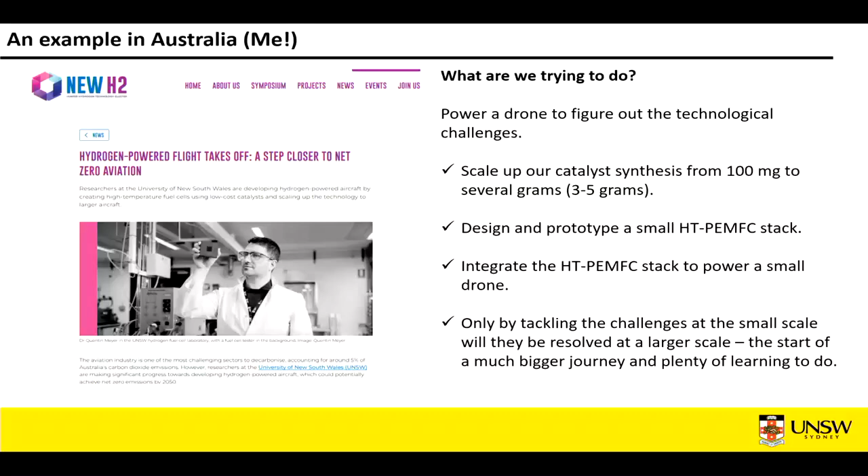So that may be a problem long term. I'm meeting with them at the end of the month to see. But I think there is a problem of where the energy is coming from to start your system. That's what I was saying before. Even if you win, you may still lose on the other side.

So the big problem of aviation, and that's why fuel cells, apart from saying, hey, they're cool, I want to make them into a plane, the big problem of flight is that, you guys probably know this more than me, it takes more power to take off than to actually fly, to move the thing off the ground. And the problem with that is that you need more power.

If you have a battery, you need a massive battery to take off, and then to fly you need less power. So that gives you a funny problem: you've overspec'd your system, and you didn't need to, but there was no way to start moving otherwise.

With the fuel cell, that's slightly less of a problem. You may find a way to operate them at different pressures, but it's still an issue. Overall, you get a much lighter battery. The battery may take some of the takeoff power, and then when you're flying, the fuel cell takes the rest. I think there have been fuel cell drones before, and they managed to go from about 30 to 45 minutes of flight time to 5 to 7 hours.

So there is a big market for that, even at small scale. The reason I'm making my life harder with high temperature fuel cells is because they don't need any liquid cooling, so potentially they're much lighter.

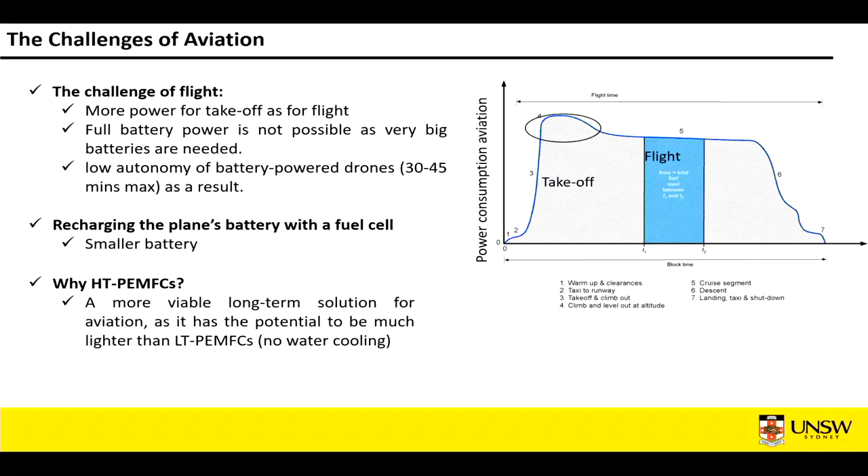So how will a hydrogen plane look? That's what I was trying to say before: you basically put all your hydrogen in the wing, the way right now you put fuel in the wing. The fuel cell powers the engine, you take your oxygen just from the air by moving, and you get water vapor.

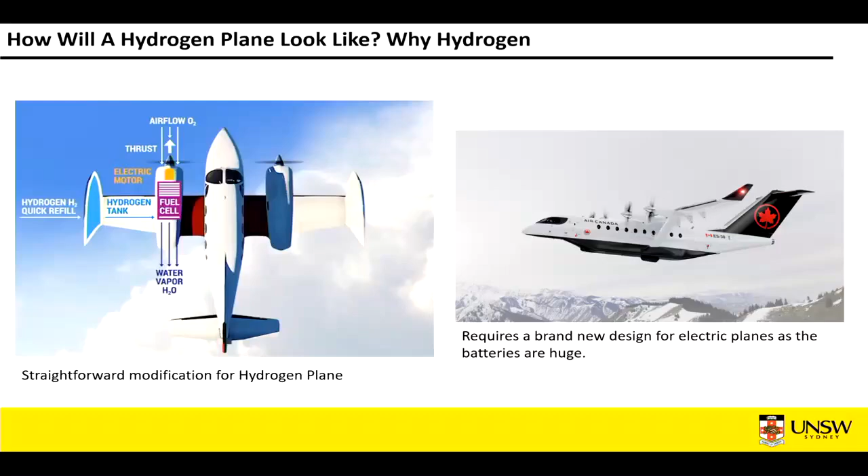A battery plane, that's the one over there. You can see there's something weird at the bottom - that part is literally the battery. It's an artist's view of it, but you basically need a massive, heavy battery underneath.

There's a fun company based in Bankstown. This is real, this is an artist's view, but I've seen the real thing. They're making a giant drone big enough that you can go inside of it, and they're calling it a flying car. I thought they were insane. Then I saw the guy, and I was like, yep, you're definitely insane, but you've been given enough money to do it.

So they're actually trying to do this for real in Bankstown, and the plan is for accessing remote areas within Australia. I thought they just wanted to be in downtown Sydney, but they told me that wasn't going to happen.

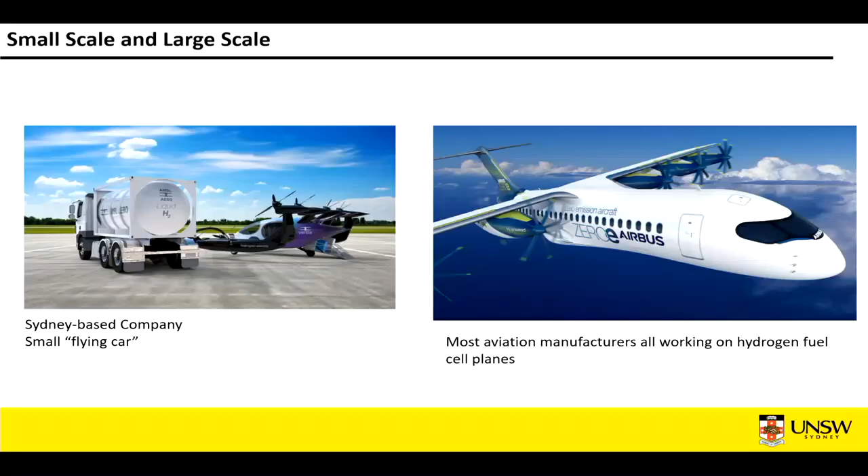Anyway, the point is there's all sorts of scale for fuel cell planes. I reckon projects like this are potentially more of a learning exercise for massive companies. For instance, Airbus - if they try to do something right away on a massive scale, that's not going to work. So they're going slowly, from like a 5-person passenger plane to 20 people, and then slowly learning and getting there. That's why this isn't going to happen overnight, and why the market projection to 2034 is much lower - it's going to take an enormous amount of R&D, but potentially really interesting.

Something I actually just made this morning as well: can we just use hydrogen directly? Do we actually need to bother with fuel cells? You can put hydrogen directly into an engine. Let's see if that plays - yeah, there you go, that looks very fancy. I think it's from a company making hydrogen engines. You inject a tiny bit of hydrogen right there, you burn it in the engine, and that powers your engine that way.

On one side, it's much better than fuel engines. On the other side, you're still not quite clean, because when you burn hydrogen at high temperature and combust it in oxygen and air, you actually end up cracking the oxygen and nitrogen. So you make water, but you also make nitrous oxide. The combustion engine people say, hey, I don't make CO2 anymore - that's true, but you make nitrous oxide, which is a very dangerous greenhouse emission, the most potent greenhouse gas. So there is a way to go.

There is talk that you can clean it, but to me it's not a long-term solution. I see it almost more as the oil and gas industry trying to stay in business by saying, hey, I can just put hydrogen into this and it's cheaper. In practice, this is just my view, it may not actually happen and may not take off, but it's seriously considered because it's much easier to do - you don't need to change the engine, you just need to put a hydrogen tank and modify your engine a little bit to inject hydrogen.

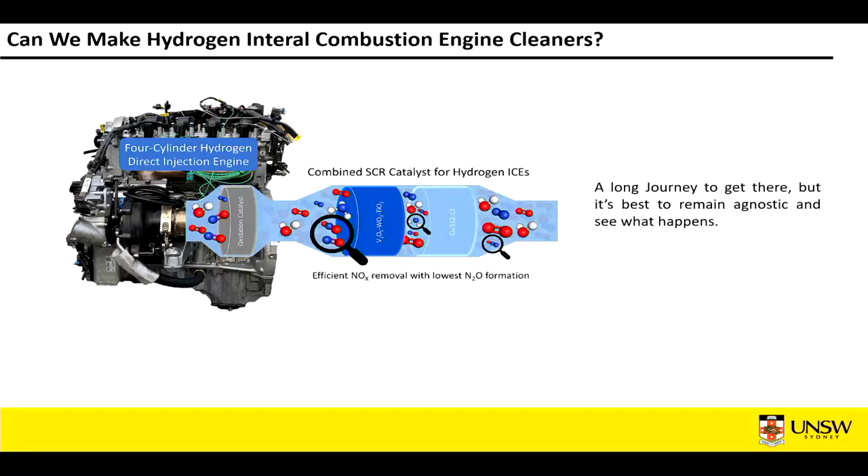Another fun thing about hydrogen engines is because you're not burning fuel, you're burning something which is not as efficient, so you also make less power. So the biggest advantage of hydrogen combustion engines compared to fuel cells is you don't need to make a new device — you just modify something that exists.

From an industry perspective, it may make a lot more sense, because a plane made today has a lifetime of 25 to 30 years. If you tell a plane company that made their plane 10 years ago that they need to throw it away, they're not going to want to — it would cost so much money, it's not going to happen.

So this could be looked at as a short-term solution, and when the plane expires, it's replaced by a much greener plane. But we need solutions that don't just say 'in 30 years we'll have decarbonized' — we need solutions that actually work now. And this may work for now. It may be a bit like putting a bandage on a bleeding wound, but it's better than bleeding out. So that may be a solution.

I'm still mixed on this, but I see it as something that may help us get to net zero — for right now, decarbonizing by putting hydrogen into a device that already exists instead of launching a whole new industry. And while this happens, we can develop the new industry, but we have 20, 30 years to do it. So that's the trade-off of how you actually get there.

There's plenty of work on that, but again, you need a million-mile truck. There's a program in the US called the Million Mile Fuel Cell Truck. I don't think they've ever actually run a fuel cell for a million miles so far, because it would take way too long, like two decades — but this is kind of the idea behind it.

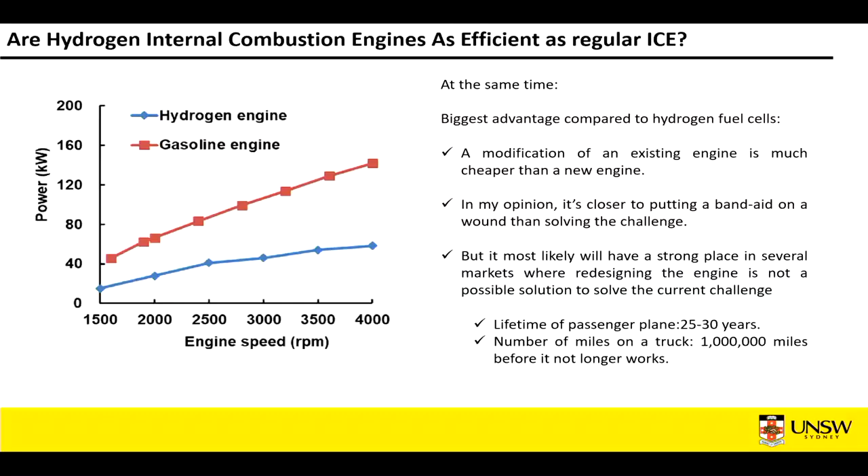So now I'm going to finish in the next 10, 15 minutes. I'm going to give you an overview of the kind of research I do on fuel cells, just to give you a sense of it.

The biggest problem for me with fuel cells is that they're too expensive — that's what I've been telling you guys so far. They cost so much money that it doesn't make sense to make them. So what do we have? From a fundamental perspective, fuel cells use platinum. The price of platinum was somewhere around $100,000 per kilogram at one point in the 2000s. Now it's going up and down, but basically the price of platinum follows the world economy. And these days, most platinum comes from Russia, so we're going to have problems — we already have problems — with platinum.

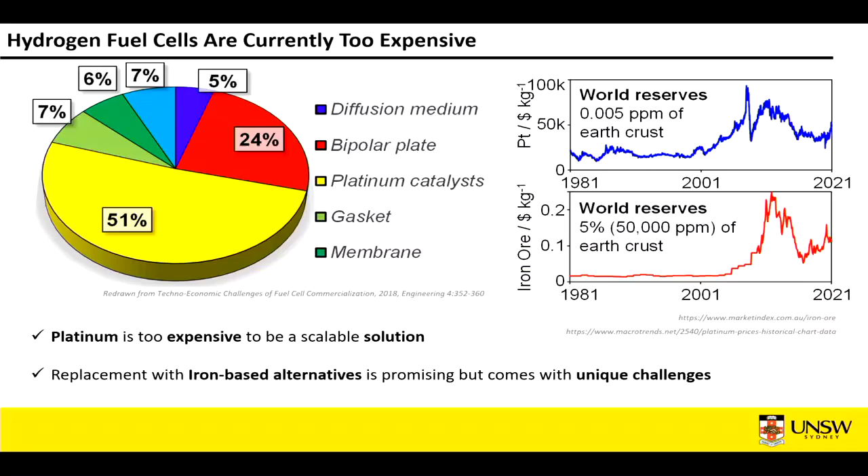But the good thing is, we can replace it with something much cheaper. So what do we have that's way cheaper? Iron actually doesn't work too badly for fuel cells, so we can replace platinum with iron — that's much better. And iron is pretty much unlimited, it's almost free — we're talking a million times cheaper. But it has a lot of problems. It's not as simple as just swapping a bottle or changing water containers; it's a whole new industry to actually even do that.

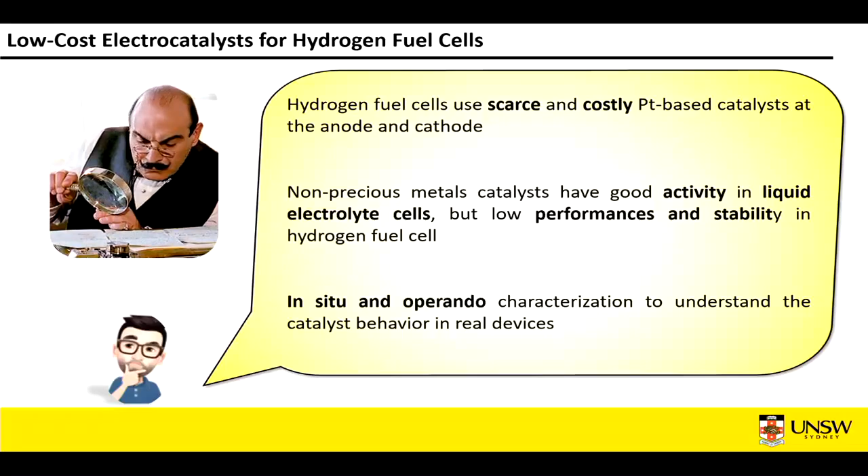The idea of this is we want to replace platinum with something else. It may work really well at low, ideal lab-scale conditions, but the moment you put it within a fuel cell, the new catalysts tend to die out in about 60 hours. Something a PhD student made in a year of research, in the next 60 hours, the performance has dropped to zero. So there's a lot of problems in that area.

We do a lot of tests. This is basically moving from a liquid environment in a chemistry lab, in a little beaker, to an actual fuel cell, which is completely solid - a lot more complex system.

The way the reactions happen is called the triple phase boundary, between the active sites and the transport of protons and electrons. This may look quite simple, but in practice it's really complex to build a fuel cell that has enough triple phase boundary. If you don't have enough, you may have a lot of catalyst, but a lot of it won't actually do anything for the reaction because it can't react properly - it will just sit there with no reaction happening.

Without bombarding you with too much detail, the problem with platinum-free catalysts is they're not as active as platinum. So to match the performance, what you typically do is put a ton of catalyst - instead of 0.2 to 0.4 milligrams, you end up putting 1 to 6 milligrams.

So the catalyst layer, instead of being around 10 microns - very easy to transport protons, electrons, and diffuse gas - is closer to 100 to 180 microns, which is the thickness of a human hair. In electrochemistry, when you start to see stuff with your own eye, it's not a good thing, because you need to conduct electricity through something that's thick enough that you can see it.

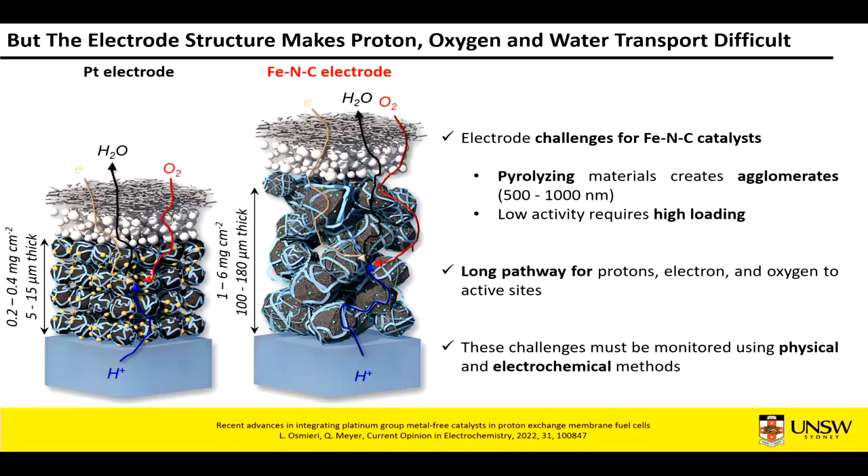So a lot of problems come from there - a long pathway. The kind of work I've done a lot, what's really fun, is we know it's a problem, but how do you monitor it? How do you quantify it? I've done a lot of fun papers in that area.

But overall, as an idea, this is the kind of performance gap you get between different materials. So a platinum-free catalyst gets you somewhere around 1 watt. A lab fuel cell gets you 1.8 watts per centimeter square, and a commercial one probably gets you to 2.5 to 3 watts per centimeter square.

A lot of papers, the way they cheat is they operate the platinum fuel cells badly on purpose. That way they can say, 'hey, my catalyst is very close to the platinum-based one.' That's because they haven't operated the fuel cell well enough, but the reviewers don't always know that, so they can claim they've bridged the gap with platinum.

But a company would say, 'hey, my fuel cell with the same catalyst will do much higher.' So there's a debate about how you bridge that gap, but the idea is making better catalysts and figuring out what the problem is.

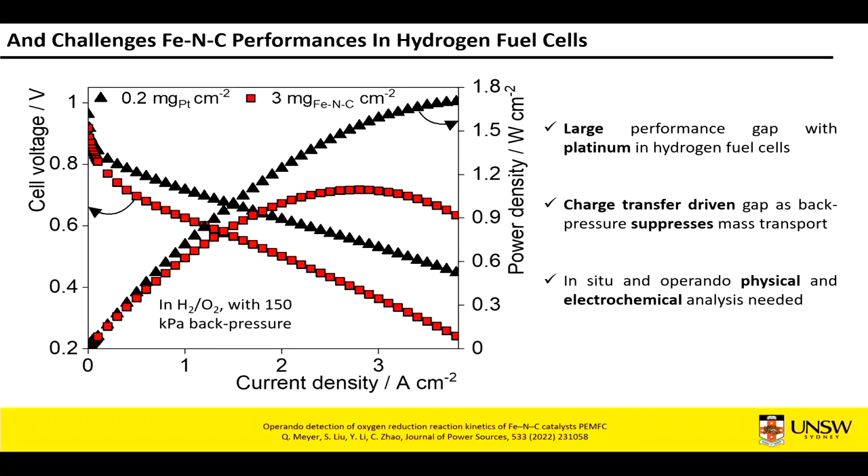The problem is that in 30 to 80 hours, in 100 hours, most catalysts have lost 30 to 80% of performance. There have been really exciting breakthroughs recently, but most catalysts in the field just don't work for long enough. So what happens is you publish a paper in Nature or Science, and in the very last sentence, you conclude that stability issues haven't been solved.

And when you dig up the figure, the thing has no more power after 20 hours. They've managed to publish in Nature with stuff like that, because people are focusing so much on the exciting design of the material that they don't care if it actually works long-term. So it's really tricky to figure out.

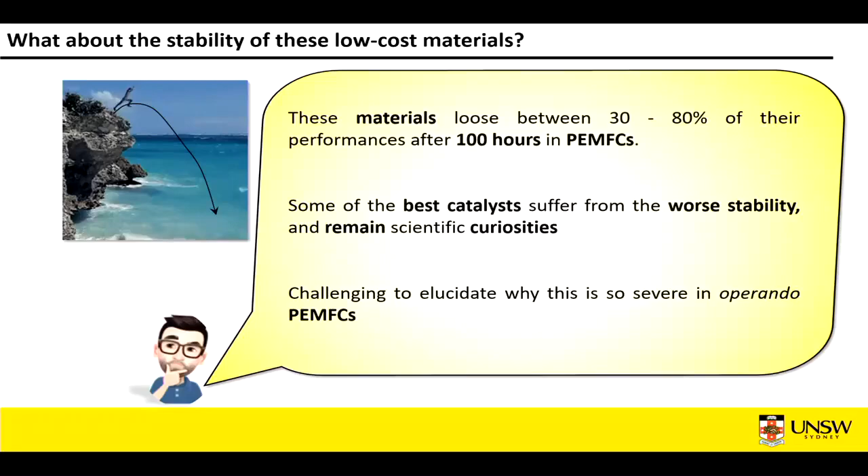And in 35 hours, you lost 80% of the power. So it's not just that the power is gone, but you can't actually get it back because the materials have fundamentally degraded. It's degrading at an extremely fast rate. The funny thing is it degrades so fast in the first few minutes of operation that you can't actually get the power you've reported twice.

You report it, you probably hire 5 PhD students, do the experiment 20 times, and report the best. But what you don't show is the moment the student repeated it, and that may be captured in 5 seconds - that's what happened, then I ran it again, that's what happened the third time. When I show this at a conference, I often have a few people laughing, because everyone knows that, but we don't like reporting it officially.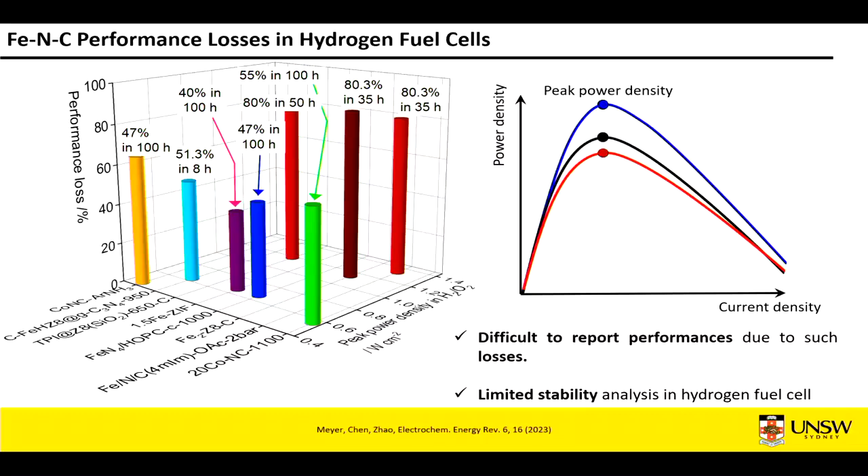So the big problem is, how can you even claim that you had 1.4 watts if you try to run it twice and you only reported 1.2 watts the second time? And the third time you run it, in literally 5 minutes, you've lost 10% power. So there's a big debate about whether they're even reliable, and it's quite hard to actually analyze them.

To go a bit more into the details, they have two problems. One is they use iron, and iron leaches out, so it's physically gone. The other is carbon corrosion - they use carbon-based material, and around 80 degrees in acid, carbon has a very strong tendency to corrode. So the carbon corrodes, and you had your nice structure, but eventually you have so much corrosion that your catalyst site falls off too. Then you end up with just carbon that doesn't do anything for you. So that happens a lot.

Quantifying it is what I've spent a bit of time doing. Here's the catalyst we've made. According to the field, they were actually fairly intermediate stability materials, given that in 60 hours we lost, I think, over 50% of performance - people said that it was actually okay. That was the scary part, that literature we looked at said, oh, that's actually not too bad for the time.

So we tried to replicate it, but instead we tried to make loads of measurements in between. And what we figured out, which got us really excited and got us plenty of papers, is that the phenomena happen at different times. Iron leaching happens at the very beginning, and carbon corrosion happens much later.

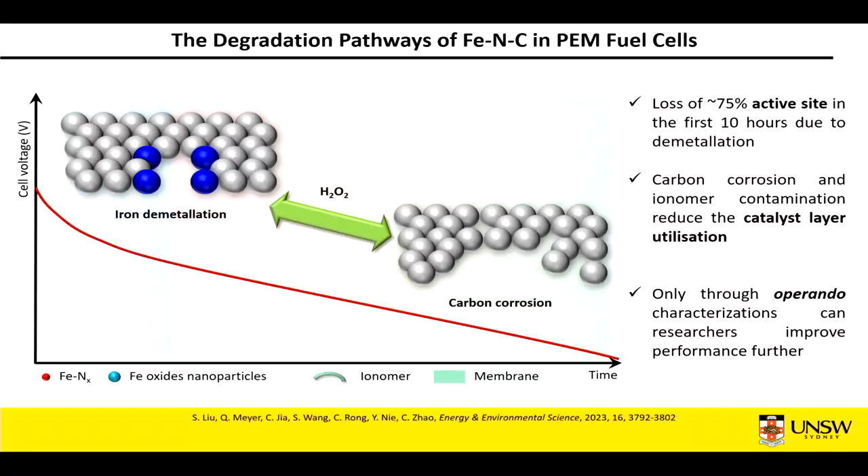The important thing is we were only able to do this with loads of electrochemical measurements. A lot of people in papers just report a stability graph with no data, no explanation, and conclude by quoting a paper from 20 years ago to tell you why it's degrading. But papers now are changing to actually try to understand what's happening.

So we want to avoid making hydrogen peroxide. The reason we make hydrogen peroxide is we absorb oxygen, and the oxygen is absorbed way too much. So instead, we try making a dual metal catalyst, where we kind of share the load across two metals, so the absorption energy is not as high. That works better.

The funny thing for us is we probably tried the wrong metal, but that gave us an interesting study because the material was just slightly more stable, but enough that we could see the difference between the two materials. So we did an iron-manganese-nitrogen-carbon and an iron-nitrogen-carbon. Instead of making 2% hydrogen peroxide, we make 1%, and the two stabilities were different enough that we could do a study.

It will never get to Nature because we don't have something stable, but we have something more stable, and we can figure out why it's more stable. And the good thing with these studies is the next PhD student in the group now knows, so he can fix it - that's what they're doing right now.

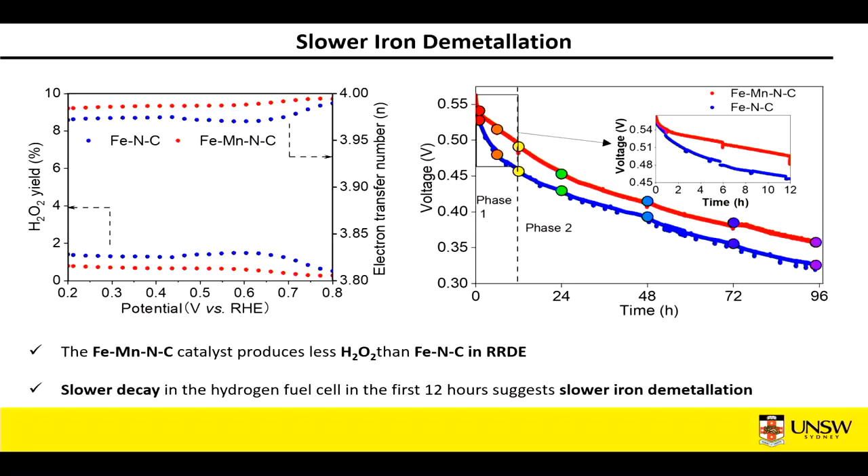The guy has graduated, and he was really upset for years because he didn't fix the stability problem, but the next guys who are working right now are actually improving it. You need to be able to figure out what the problem is before you fix it.

So we did some measurements like this, and on the left side, yeah, we don't have as much carbon. So the Q/QH is carbon corrosion. With any carbon catalyst, there is a massive amount of corrosion, and with this catalyst there's not as much. Also, the iron peak means we're losing iron, basically. It's getting bigger, but not quite for the right reason, it's getting bigger because we're corroding it so much. There are more active sites available, but eventually they're not the ones we want.

On the left side, that doesn't change as much. So we haven't fixed the problem, but we can understand that this catalyst is kind of better, and we can exactly quantify why it's happening.

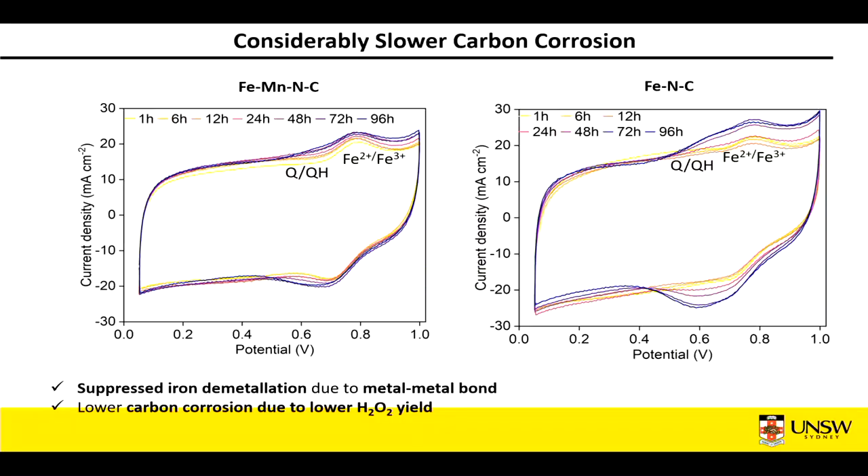So now, moving to another part - I'm sorry, there should be a Y here. There you go. Need to fix that for London on Sunday, on Tuesday.

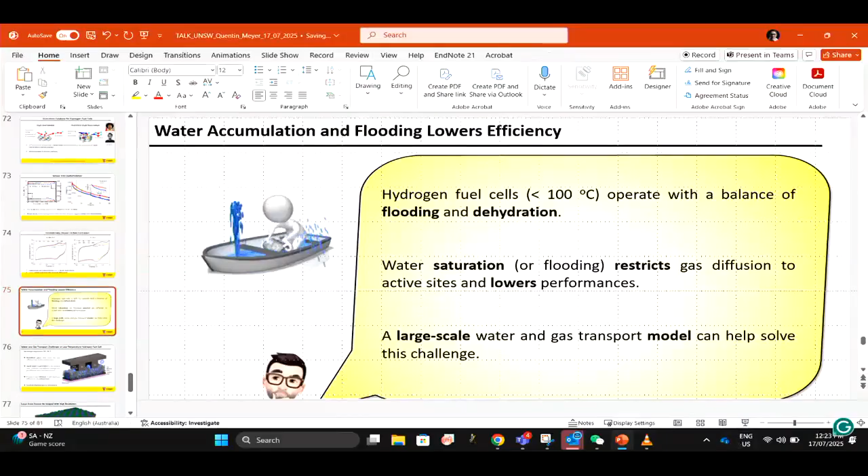So water accumulation and flooding makes the fuel cell less efficient. What's happening when you have flooding in a fuel cell? You literally produce water, and if you can't remove it, it will just accumulate in the same place. That means it's flooding, and you can't actually remove it anymore.

That may look straightforward to do. A lot of people in chemistry say, hey, it's an engineering problem, it's easy. It's not. It's really, really not. It often requires redesigning the entire fuel cell to have less flooding, and that's not necessarily straightforward.

So I've got this slide here to give you a sense of this - it's rough, not the right scale in terms of accuracy, but it's roughly what happens on a small scale in a fuel cell. Every single point produces water, and we have flow fields, flow channels, where water just flows through because we are pushing air through.

And we have the ribs. The ribs are the area where you have electrical contact, and the water can't actually go away from underneath these areas. That gives you a lot of fun problems if water builds up really fast. If water is not removed, it blocks access to the catalyst.

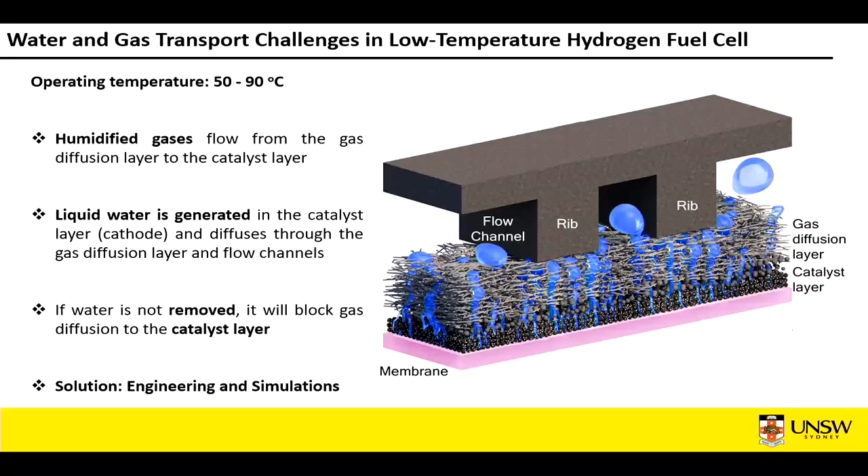So the solution we worked on is, well, maybe we can't fix it, but we can do a lot of simulations to figure out exactly what's the problem. The first part of this - and there are a lot of pretty pictures coming up - is when you do imaging, if you've done any SEM, you want to zoom in to get a nice picture of a clean area. But the problem is whether this very tiny area represents a larger area.

Looking at a fuel cell structure, even at the 200 micron scale, nothing is actually very uniform. It varies really fast. The problem with simulations is often we want to simplify everything, just say, hey, my porosity is 80% and my tortuosity or permeability is this much. But in practice, it may be massively heterogeneous.

So one approach is to just simplify everything, or take a tiny volume, scan it with X-ray imaging or something to get the structure, and just assume my tiny area represents the much larger area. We tried to work around that, and we had to use a lot of AI for that.

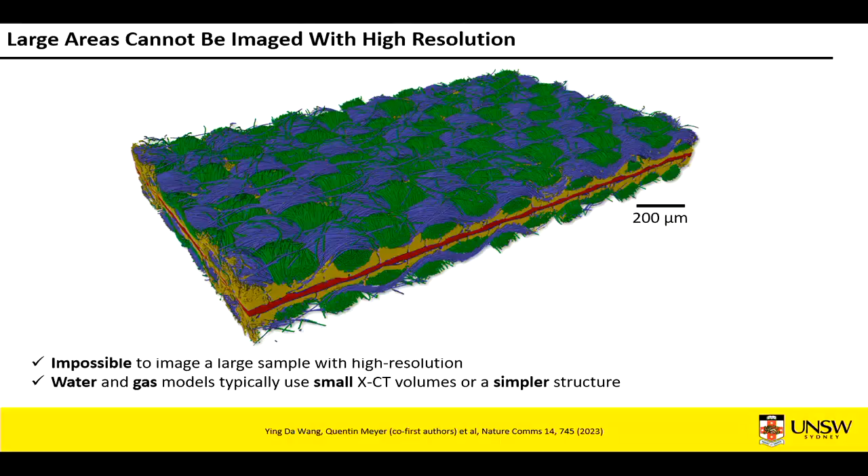So this should play - just to give you an idea, this image is actually X-ray imaging, like imagining you're at the doctor and you have different slices of your MRI. These images are different slices inside the fuel cell, so we're just moving through the fuel cell. And what we did - I say we, I mean people way smarter than me did this with me, when I just directed them and they made an amazing piece of work - that's Ying over there.

You start with an X-ray image, not very high resolution. Then we used AI enhancement, and we get to this image, which is much higher quality. And then we segment it using, again, more AI. Segmentation is to identify what each material is. On the gray image, you can't actually do any simulations. Once you've segmented it, you can convert it into an STL file or a drawing format, and you can run simulations on that.

So that's what we did over there. We got to these kind of images. I've watched this way too many times because it was the first time I got something in Nature Index journals.

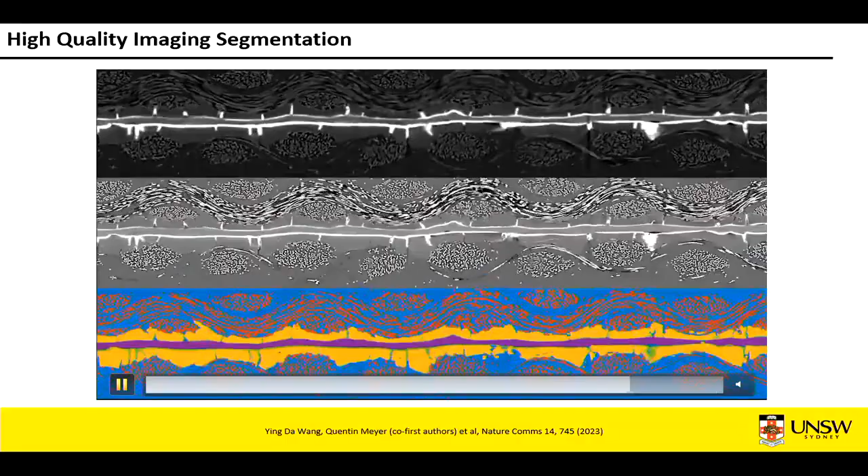Then we looked at it and asked, okay, what can we do with this? We've got something cool, so we can actually do simulations of water and gas transport in fuel cells. That took a humongous amount of computing power. It looks like nothing, but to run this was on the fifth most powerful computer in the world, or actually I think the most powerful computer accessible to civilians, to simulate two-phase flow dynamics.

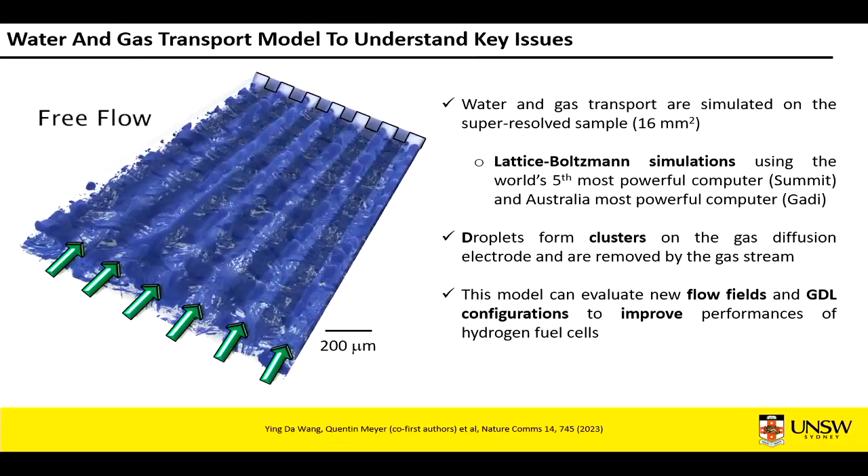That was accessible to us through a grant. The idea is, while we're producing water, it's emerging out of a porous media, and it's quite complex to remove. This is kind of where water is moving. The fun thing is it really shows a lot of information about how water is transported, and you can see how changing regimes changes the water management and transport properties completely.

What I'm working on at the moment is, now I've got a cool model I can use, but this used a real structure with a fake flow field overlaid—fake channels. We just went, okay, I'm going to put channels that look like this and see what happens. What I can do now is try to be cleverer, change the design, do the simulations, then access some really fancy prototyping equipment.

We upgraded our CNC in the lab to be able to make something at the hundreds of micron scale. So we make it, and then we say, okay, the simulation says it works, let's put it in the lab—maybe it will work, maybe it doesn't. But we can actually close the loop between simulation and experiments, and that gives us some really interesting work we're doing right now.

It's been a year that we've tried to get it published, and maybe it will get published soon. But the idea of this is to do simulations for a purpose. A lot of people run simulations because they're just interested in the problem, but they don't actually fix it—they just run simulations for the sake of getting closer to resolving it. Instead, what I'm trying to do is resolve the problems.

So now, this is pretty much it—you guys are pretty much free after this.

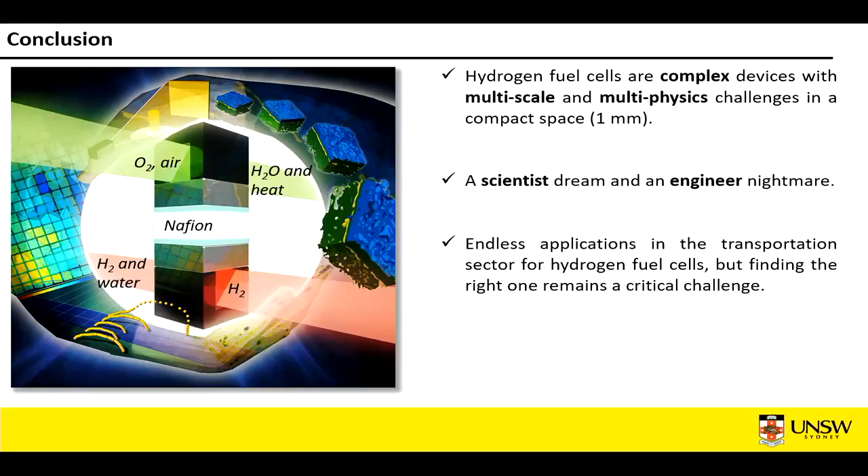Such an amazing presentation, Quentin. In fact, you really cut through the hype of hydrogen. I really liked the terminology when you said the hydrogen evangelist—I've seen them on LinkedIn, it's amazing, the titles make no sense at all.

You know what, honestly, I was reminded of myself. A couple of years ago, my research focus was more on heavy vehicles, port logistics, basically heavy transport vehicles, and electrification is such a struggle for those use cases. I remember when I was first exposed to hydrogen fuel cells, I thought, that's the solution, that's the solution. I gave a presentation—I'm so embarrassed, actually, I cut it off, hid everything.

Because you just get excited. And then it doesn't necessarily happen. But I really like that you presented all of the realities around hydrogen.

That's what we have to learn in university, because you will be the future environmental engineers, the future decision makers in government, the future advisors, and the new generation of engineers that could fix this problem. But we are too old. We've shipped out for the next 30 years. We're gone already to fix the problem.

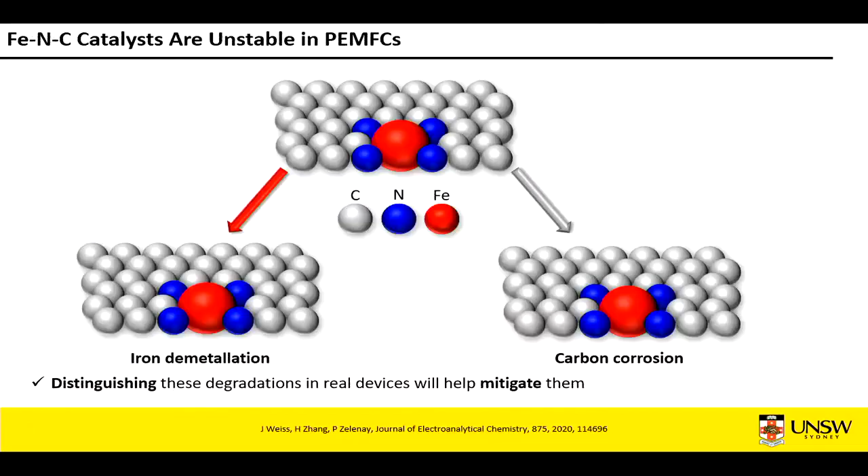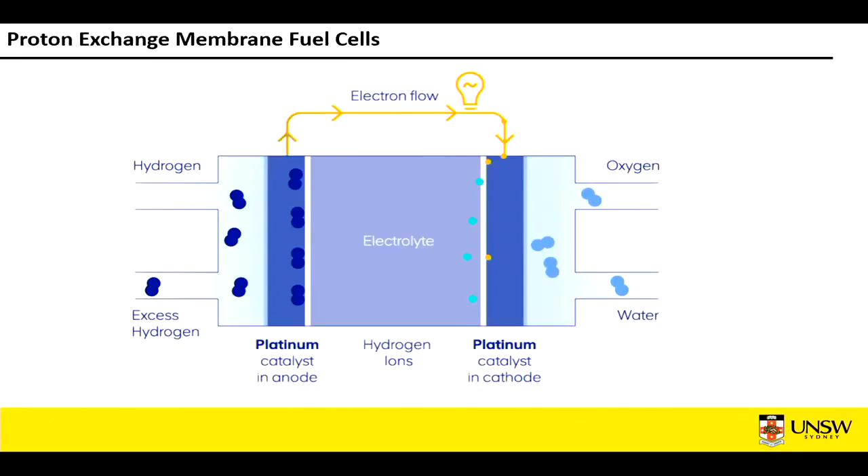Basically, I have a collection of these. Right, awesome. So guys, selfie or photo? Selfie. You need to be in the photo as well, though. We'll get one selfie as well. Okay sure, for me it's just the memory of you guys that's important.

Well, last time it was only four of you, so this is double compared to last year. It was 9 a.m. though.

Okay, so maybe I can come a bit closer. Lighting is a bit strange, but I think here. Let's see if I can fit you all. Yes, that's good—that one is very bright and glary, but it's okay. Great, ready? 1, 2, 3. Hydrogen! That was good. Let me see if I can.